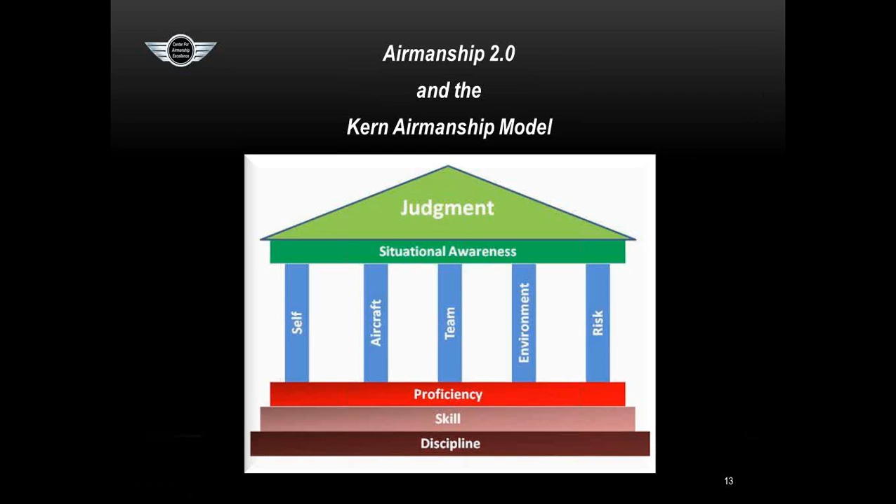Another way to look at Airmanship 2.0, what is it, is to ask the question: if I don't fly right, should I fly at all? I mean, at the surface this seems like a very simple question, but if you really think about it, what does right mean? If I'm not going to do everything as right as I can, should I even fly at all?

That question is answered in Airmanship 2.0 by Chuck Yeager when he said, if you're going to fly, do it right. Now, we lifted that quotation out of Redefining Airmanship, but Kern goes on to explain that when Yeager was first quoted for this statement, he was a young test pilot. So this isn't the old general, 60-some-year-old Chuck Yeager who got conservative and paranoid like all of us old aviators have a tendency to do. He's been saying this all along, and he's generally recognized to be one of the top aviators on the planet.

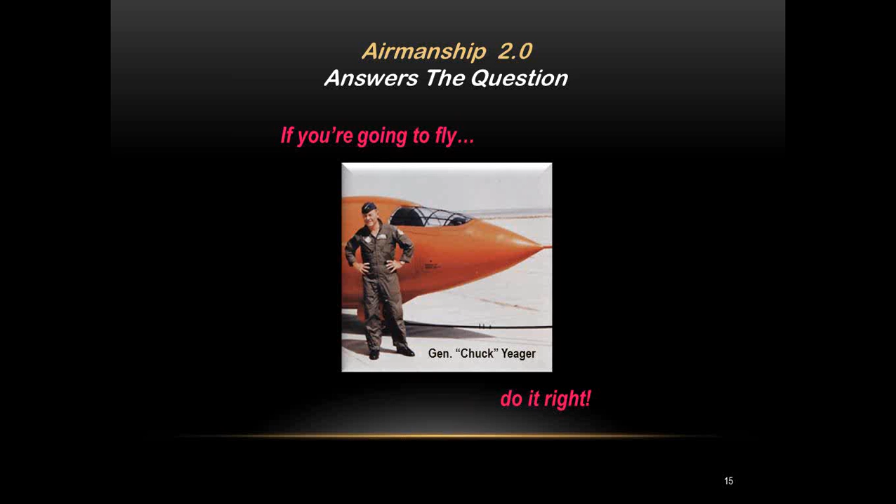So that's Chuck's motto: if you're going to fly, do it right. It's my motto, and it's the motto of Airmanship 2.0. So another way to look at Airmanship 2.0 is doing it right. Of course, the devil's in the details of what doing it right means.

Airmanship 2.0 is really a new paradigm in personal flying. It's a new way to approach it. But it's based on tried and true airmanship principles that have proven to be effective with the airlines and military. But we've modified those for use by us, by personal flyers, in today's flight environment at a reasonable cost.

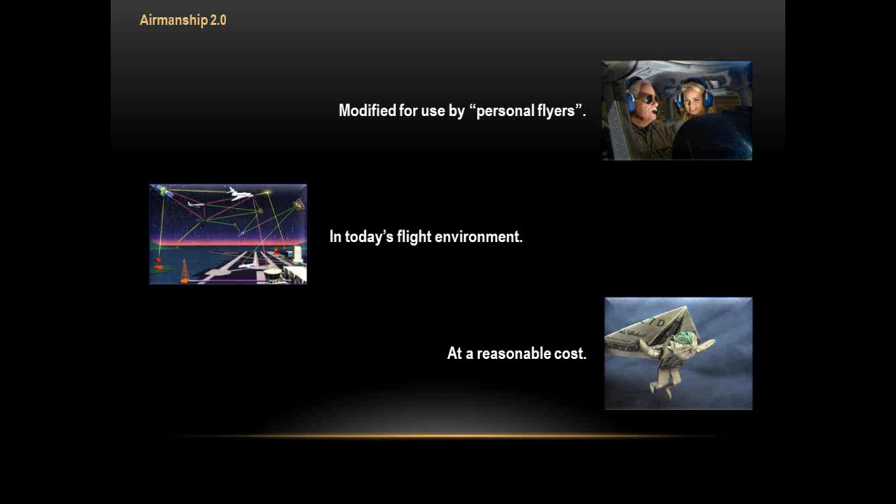A lot of people will say, well, you can't have all of these things that the airline guys and the military guys have that enhance their airmanship, make it safer, make it easier, make it more fun and enjoyable. And the answer is yes, you can, because we've run the cost analyses, and a lot of us have looked at it, and we think that we can do all these things at a reasonable cost in Airmanship 2.0. Airmanship 2.0 is a new way for you to enjoy flying.

If you've been flying for a long time, I know from personal experience and guys I talk to, the bloom is kind of off the rose for a lot of us. So it's a new way for us to get back in there and enjoy it. For those of you who have not been in flying very long, it's a way for you to keep enjoying it. We have that old saw about the $200 hamburgers and boring holes in the sky. So Airmanship 2.0 is a way to enjoy it more.

It's also a new approach to maximizing the personal rewards you get from flying. And of course, Airmanship 2.0 increases the value you get for your flying dollar. We all believe that flying is too expensive. It should be free, right? It should be somebody else paying for this for all of us. But we in personal flying, we have to pay for it. So we need to get the max value out of every dollar we spend, and Airmanship 2.0 is designed to do that for you.

Airmanship 2.0 continuously enhances your airmanship skills, knowledge, and capabilities. And that's what Airmanship 2.0 is all about. Airmanship 2.0 is a surefire way for you to become a safer, more proficient aviator.

Standby one, I'm scanning the roster for hands up. I see a hand up, I think that was Joseph Imilkowski. Joseph, did you have something you wanted to comment on? Is my mic working now? Mic's working great now, I hear you 5 by 5. Oh okay, yeah, I wasn't expecting to participate audio-wise, so I didn't even have the mic hooked up. Okay, that's it, so go ahead. Great, thank you for doing that and letting us know. I'm going to mute your mic again, put your hand down. Okay, and that's what I'll do periodically, I'll go through and see if I see hands coming up, and I will try to get to you for your question or comment. All right, looks like the board is clear. Stand by while I get us back to where I need to be, and we'll proceed.

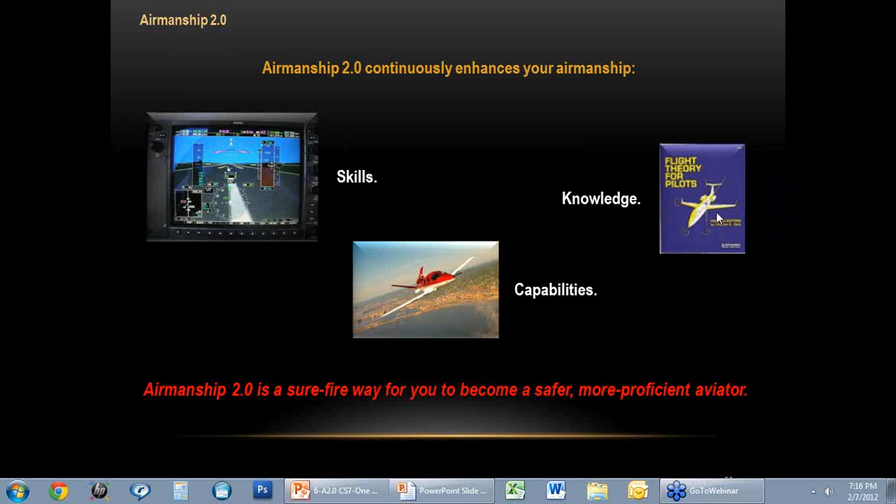Airmanship 2.0 includes a flight operations support team. This is actually a very important element of Airmanship 2.0. That flight operations support team does trip planning, helps you with trip planning, flight planning. It dispatches flights with you. It tracks your flights, it provides in-flight support, and it provides trip management. It really is shared decision making and checks and balances. Those are airmanship terms, and that's what the flight ops support team provides.

Well again, it was only the 51,000-foot flyby, that was just the tip of the iceberg. Very little information there about what Airmanship 2.0 is, but I hope it gives you a little bit of context here. If you want to explore it more, go to the Center for Airmanship Excellence website, airmanshipexcellence.org, and there's a subweb there, a menu button. Go to Airmanship 2.0, and there is a series of video briefings in that subweb that will tell you everything you want to know about Airmanship 2.0.

All right, at this point, are there any questions or comments about Airmanship 2.0 before we move into the case study? And I'm going through the roster again, so please raise your hand if you have any questions or comments. Joseph, I see your hand up again. I'll bet you I've had this before. There's something going on with your button there for that, so I'll ignore that if you don't mind and check with you later. But I imagine it's just popping up on its own. Okay, I don't see any questions or comments at this time. Stand by one more second. Quite an extensive list here this evening, so it takes me a little while to get through it. Okay, I'm going to go back to what I have to do here, and we'll move on.

All right, this Airmanship 2.0 case study number 7, one wing low.

Now, we're not going through this case study to point fingers at anybody. Quite the contrary. James Joyce said that mistakes are the portals of discovery, and that's what we're here for this evening, to learn from others' mistakes. And that's a tradition in Airmanship 1.0 as well as Airmanship 2.0, to try to learn as much as we can without having to make our own mistakes, because our mistakes can be fatal.

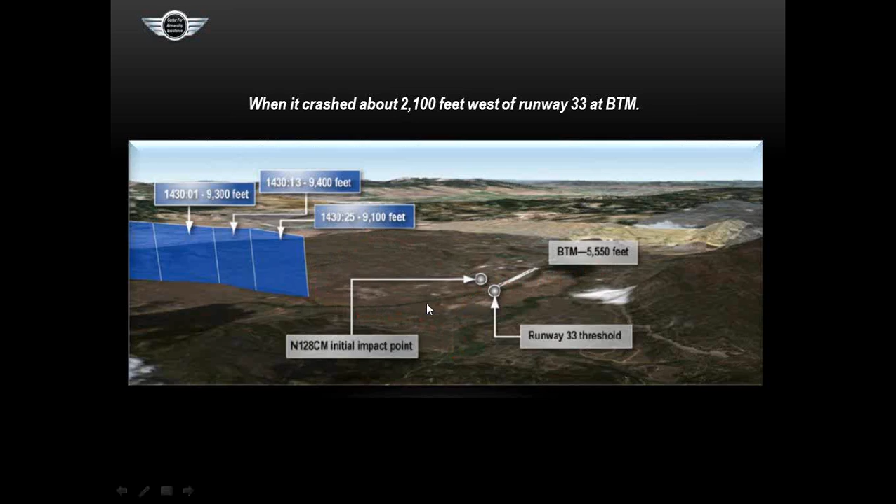The pilot and the 13 passengers were fatally injured, and the airplane was substantially damaged by impact forces and post-crash fire.

Visual meteorological conditions prevailed at the time of the accident, so it wasn't an IFR-related accident, if you will. The pilot held an airline transport pilot certificate with a rating for multi-engine and commercial privileges in airplane single-engine land. So he had proper credentials for flying the flight.

The pilot's most recent second-class medical was dated April 4, 2008, so he was coming up on a renewal on his second class, with the limitation that the holder must possess corrective glasses for near vision, so no biggies there.

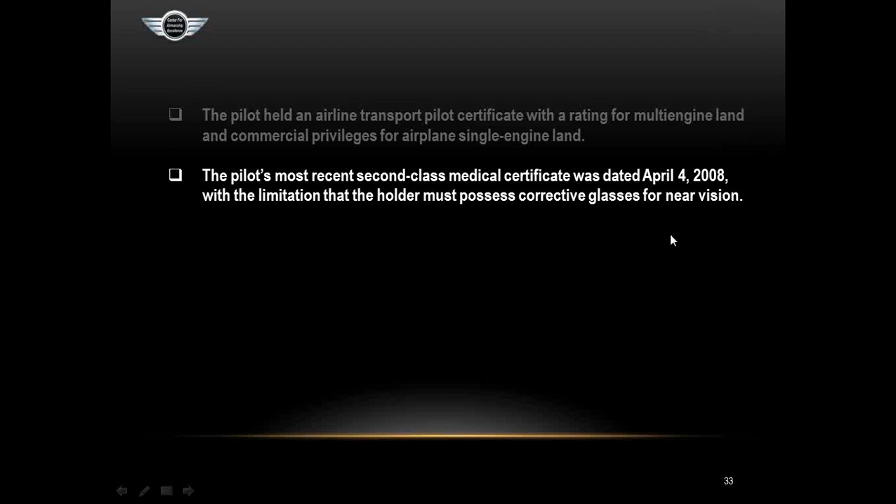The pilot had flown for the U.S. Air Force between 1969 and '72. He was type rated on the Lockheed L300, which is the C-141, and the T-33, which some of you guys remember was a single-engine jet trainer the Air Force used for logistics and training and a lot of things.

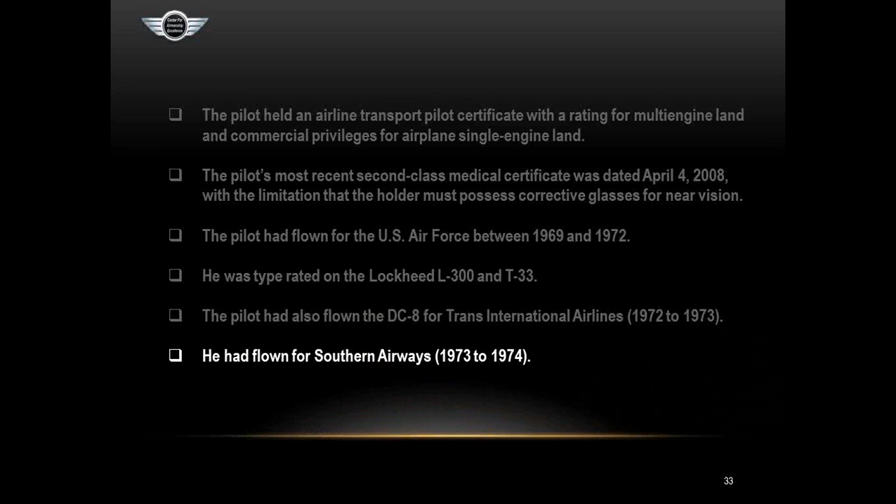The pilot had also flown the DC-8 for Trans International Airlines for about a year. He had flown for Southern Airways for about a year. They were flying DC-9s back then. He flew for Resort Commuter Airlines from '88 to '89. So, in addition, he flew the PC-12 for Native American Air Ambulance from 1999 to 2002.

When he was not employed as a professional pilot, he worked in various fields not related to aviation, so he was a semi-professional, I would call him. The pilot was hired by Eagle Cap Leasing in November 2002 as a contract pilot, so 7 years before the accident. Been there a long time.

He had accumulated 8,840 hours total flight time, quite a bit, with 1,760 in the PC-12, which is a lot in type. He had flown 35, 26, and 10 hours in the 90, 60, and 30 days preceding the accident. So he flew 10 hours in the month preceding. He flew a little more than 10 hours a month, or almost 10 hours, in the 3 months preceding that. So he was doing right around 10 hours a month.

The Air Force did a study, and for multi-crew MATS type, cargo type flying, transport type flying, the Air Force came up with the optimum number of hours a month to have peak proficiency is 40 hours a month. 30 hours a month. More than that, you have a tendency to go for complacency and fatigue and so forth, and less than 30, you're not flying enough to maintain your proficiency.

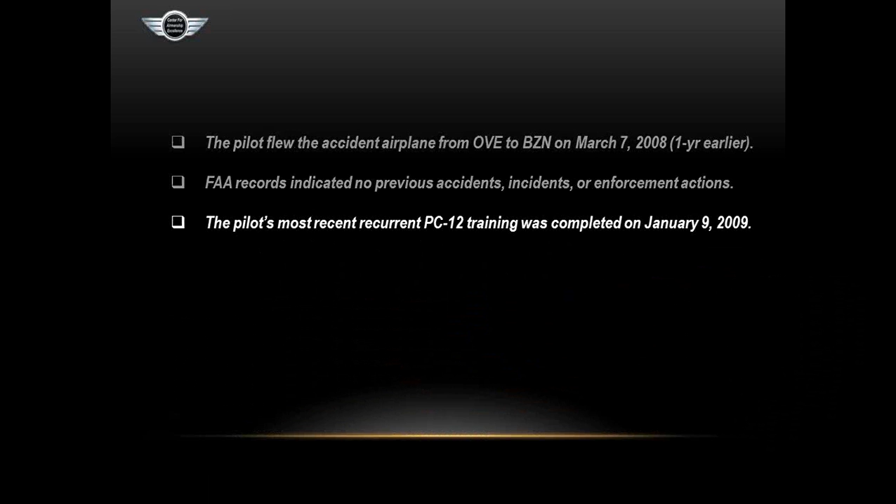The pilot's most recent recurrent PC-12 training was completed on January 9th, 2009, so he was fresh out of recurrent. The instructor stated that he had conducted several previous training sessions with the pilot between 2003 and 2009. In one of my aviation lives, I was an instructor and check airman for FlightSafety on Challengers for about 4 years, out in Tucson, and so I had guys coming back where I'd work with them every year on their recurrent.

And I really got to the point where I knew really accurately the level of airmanship a particular pilot would possess after the second, third time, for sure. So this instructor, who we're going to get some information from in a minute, had worked with this guy plenty to know a lot about him.

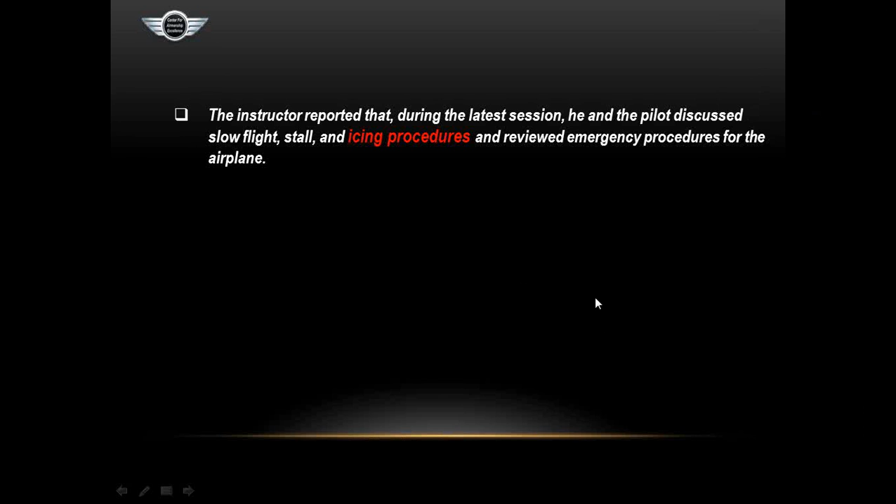The instructor reported that during the latest session, he and the pilot had discussed slow flight, stall, and icing procedures, and that's an important part of this, and reviewed emergency procedures for the airplane. So that would be standard for this type of recurrent training. They also would have reviewed limitations and that sort of thing, operating recommendations, cautions, warnings.

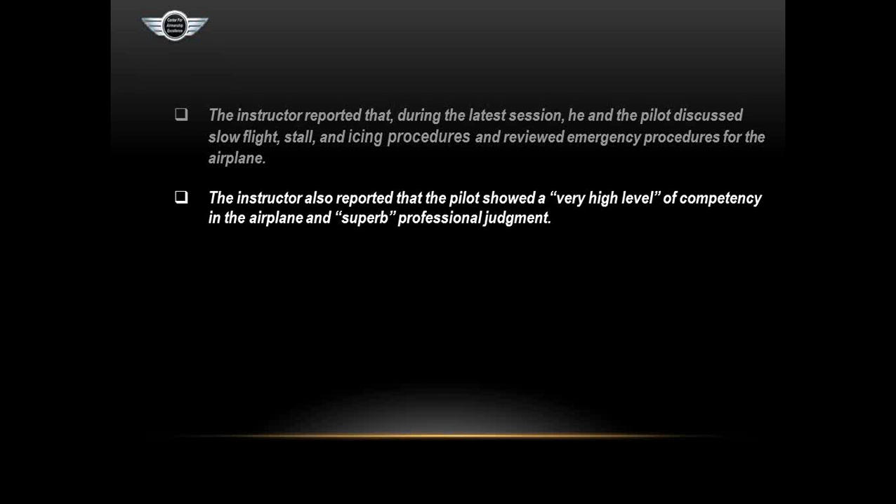The instructor also reported that the pilot showed a very high level of competency in the airplane and superb professional judgment. So I think you can see from this guy's training, military, airline, 135, and so on, that he had developed very good professional judgment. Further, the instructor stated that during a post-flight briefing, the pilot indicated he had not experienced any undue pressure to fly in bad weather or with mechanical problems.

And I used to ask all the crews that I trained on the Challenger about that, because we call it pilot pushing, but if you work for somebody that owns the airplane and they put a lot of pressure on you to fly when sometimes you don't think you should fly, that is a highly risky situation, and there are strategies you can employ to mitigate that risk. So I would pass those along and share them with the guys if they didn't know about them, if they were in that kind of situation. But obviously this instructor was very experienced.

He had asked this guy about that kind of external pressure, because that's important for decision making, risk management, and the pilot at least reported that the company he was working for didn't put any pressure on him. And an owner of the aircraft praised the pilot's professionalism. Now, it doesn't say in the report whether that owner is a pilot himself, but after 7 years, at least it shows the pilot didn't scare him. So the owner thought he was a real professional pilot.

On March 18th, which is 3.5 days before the accident, the pilot flew passengers aboard the accident airplane on a flight that departed REI. I'm sorry, I'm not coming up with the airport name. We're going to see it in a minute. I think it's Redmond. About 11:30 Pacific Daylight Time, and arrived in Cabo San Lucas, Mexico, 3 hours later. So a pretty long leg in that Pilatus, but he flew just one leg that day.

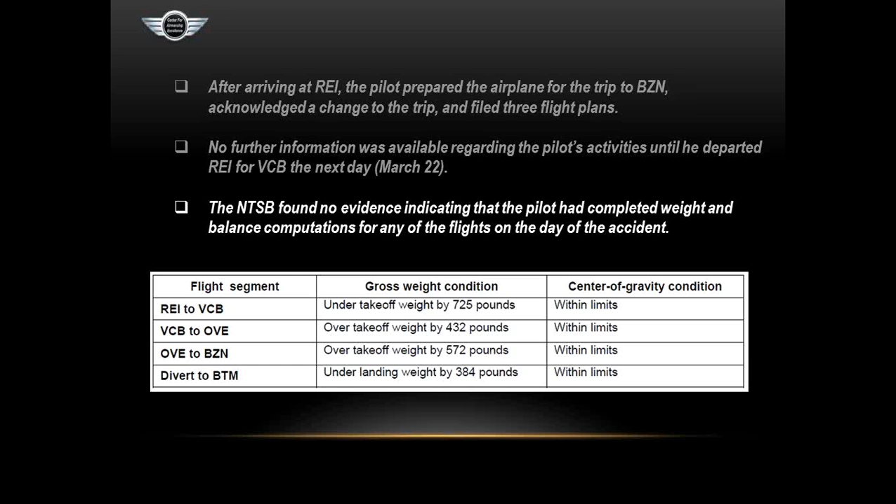The NTSB found no evidence indicating that the pilot had completed weight and balance computations for any of the flights on the day of the accident. And you can see here that on the first leg of the accident day, takeoff weight was adequately under max gross, but not terribly under. On the second leg, he was over max gross. On the third leg, he was over max gross. So he was ignoring the max gross weight limitation on the airplane. But the center of gravity was within limits.

On the day before the accident, the contract pilot had the airplane topped off with 220 gallons of Jet A to its total capacity at Redlands. That's REI, I'm sorry, Redlands, California Airport, which is just out here to the east of the Los Angeles basin. It's out here, Redlands.

Okay, stand by one while I check for hands up. Just give me a second. I'm sorry, that almost sounded like a command of hands up. I apologize. Okay, Frank Blair, I see your hand up. I've opened up your mic. Go ahead, Frank. Hi, it's Frank. I was just saying it's Redlands, California, but you got to it. No problem. Thanks, Frank, for contributing that. You know, that's one reason I do these PowerPoints. I knew it was Redlands, but I couldn't remember it, and I didn't review the PowerPoint enough. So thank you for that. Okay, I don't see other hands up, and I'm putting all the hands down. Stand by just 1 second. Okay.

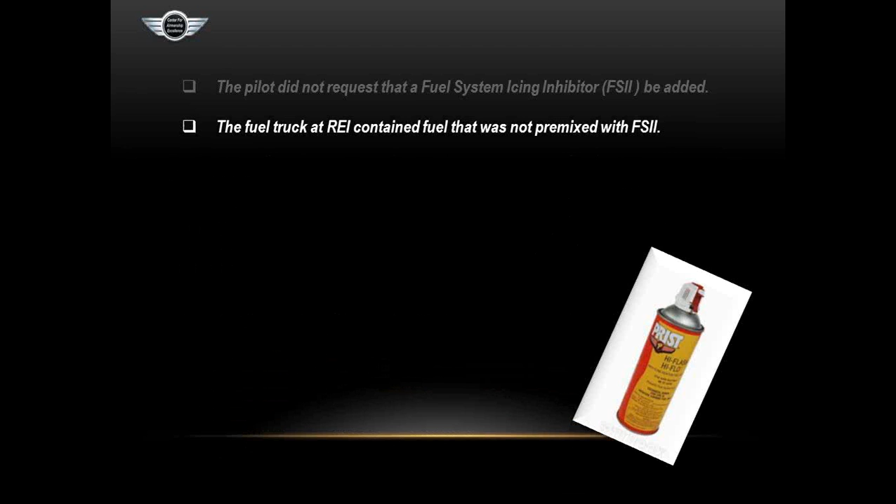The pilot did not request that a fuel system icing inhibitor be added to the fuel load that he took on there at Redlands. The fuel truck at Redlands contained fuel that was not pre-mixed with, and I'll use the term PRIST, that's the trade name for it. Most of us know it as PRIST. There are other brands, though. But the fuel pump was capable of injecting PRIST during the fueling at the request of the customer.

The can comes with a nozzle that has a little clear plastic tube, and then there's a bracket on the fueler nozzle that you plug the tube into, and you connect the can to the nozzle in a bracket, and when you squeeze the fuel handle to put the fuel in, it also then opens up the valve on the can, and it shoots a metered amount of PRIST in with the fuel as it's put in the tank.

Very simple system. Fuel records showed that between February 27th and March 21, the airplane had been fueled at Redlands 4 times without the addition of PRIST. So that's significant. Most PC-12 flights require the use of PRIST.

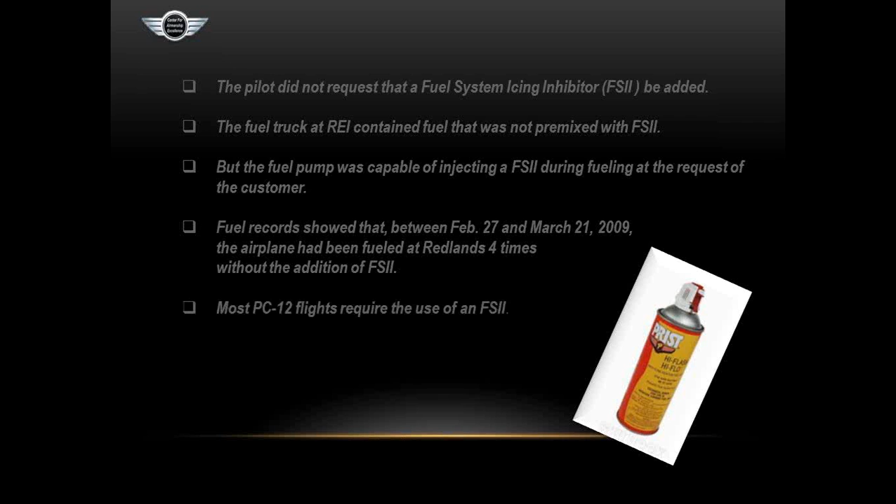So this would have been covered in his initial training, in his recurrent training, when they went over limitations on the airplane. There's no way he could not have known that he should be using PRIST on most of his flights. And it's an outside temperature limitation, which then translates pretty much into a time of year and altitude limitation.

All right, I've got the first poll question here for you. We've got a few poll questions tonight. Here's where I have to really pay attention and step through this. So stand by while I get the polls up. First poll question.

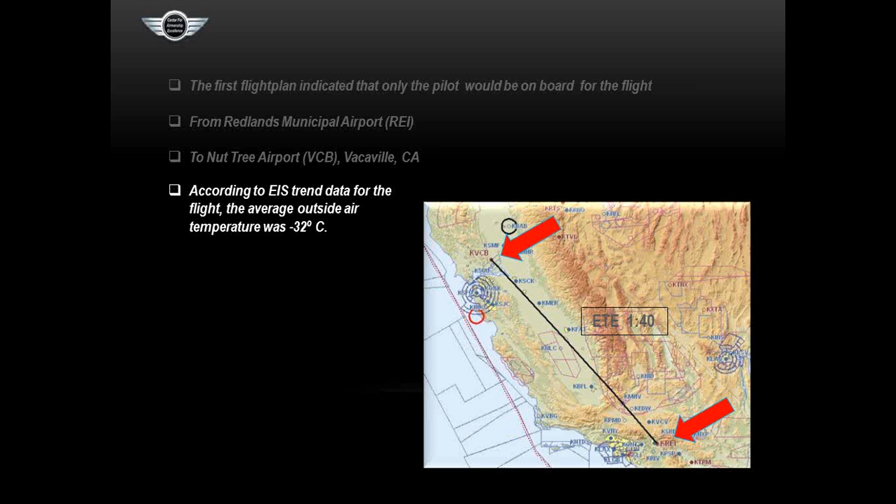According to the EIS, the Electronic Instrument System trend data, which they pulled from its memory after the crash, the average outside air temperature for the flight was -32. That happens to be much colder than the Pilatus book says it needs to be before you have to have PRIST. So in other words, he was way below the temperature for the PRIST requirement on that first leg, and it was a long leg, about an hour and 40 minutes.

About 1 hour and 30 minutes into the flight, while the airplane was already descending through an altitude of about 10,000 feet, the left and right boost pumps began cycling, generally on and off for 10 seconds, and then on for 10 and then off for 1. And we're going to talk about how those boost pumps are supposed to work in a second. So that's a clue there.

According to the Pilatus AFM, the fuel boost pumps operate automatically if a low fuel pressure state exists. The fuel pumps continued cycling for 15 minutes in this flight, even though they were designed to turn off automatically 10 seconds after fuel system pressure was restored to 3.5 psi.

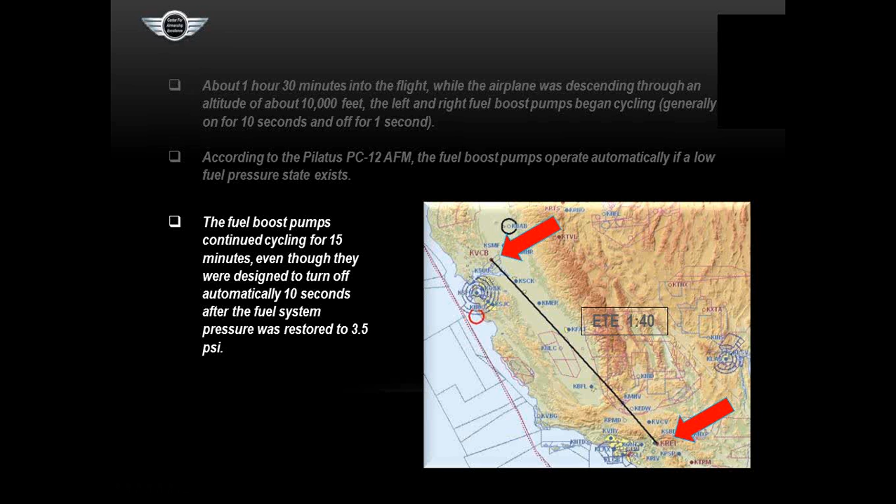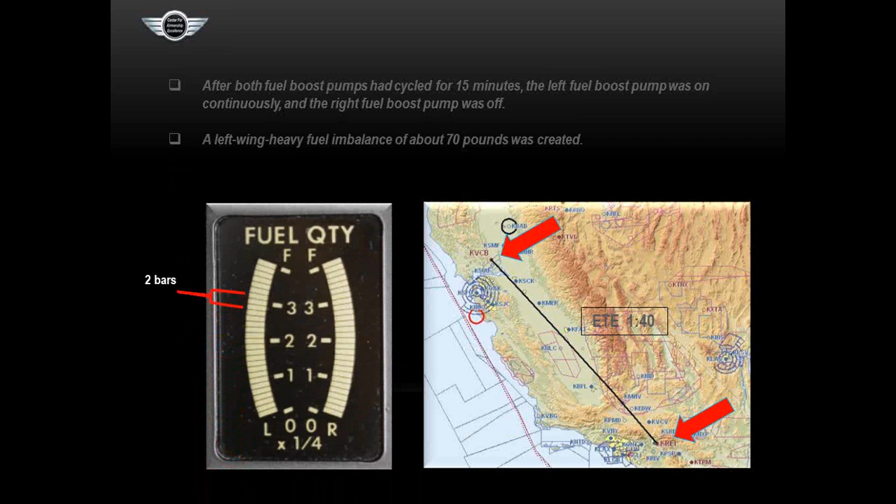After both fuel boost pumps had cycled for 15 minutes, the left fuel boost pump was on continuously and the right fuel boost pump was off, and they were both set in auto mode at this point. A left-wing heavy fuel imbalance of about 70 pounds was created, which would have been about 2 segments on the fuel indicator - noticeable, but not something that would jump right out at you maybe.

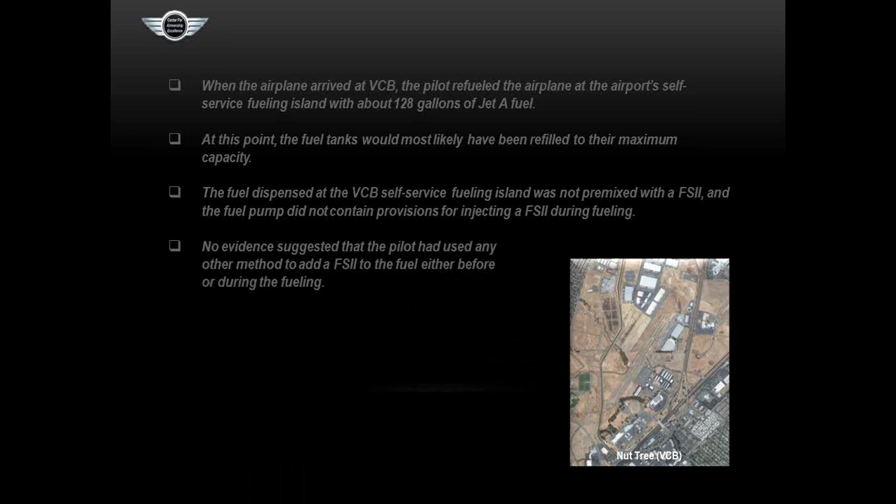No evidence suggests that the pilot used any other method to add Prist to the fuel, either before or during the fueling.

Surveillance video obtained from Nut Tree showed the pilot performing some parts of the required pre-flight inspection. However, the video showed no evidence that the pilot had sampled fuel from either of the underwing fuel tank drains or the fuel filter drains. Also, the surveillance video did not show any evidence that the pilot examined the fuel filter bypass indicator to ensure that it was flush with the filter housing assembly.

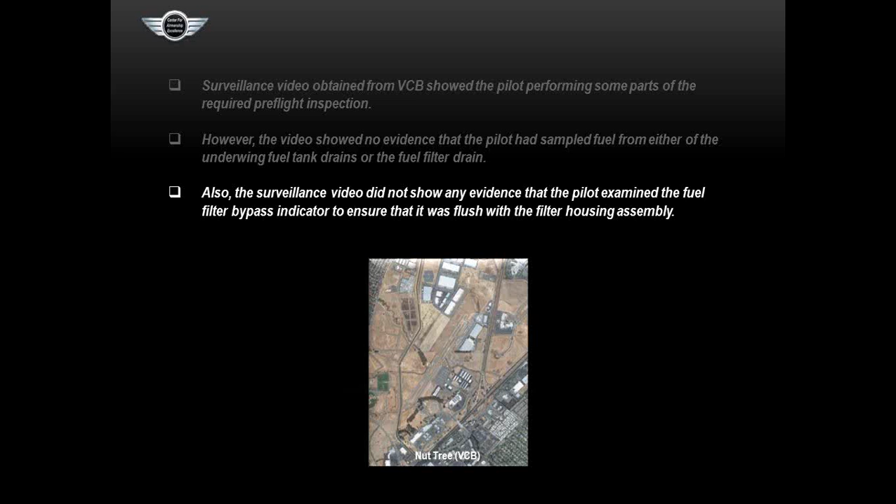The fuel filter had a bypass - a little button or rod that would pop out if there had been a bypass of the filter. That's part of the pre-flight on this airplane. If he had checked it, in a post-flight or pre-flight, that would have been another clue that something was going on with that fuel system that wasn't right. But he didn't complete a good pre-flight.

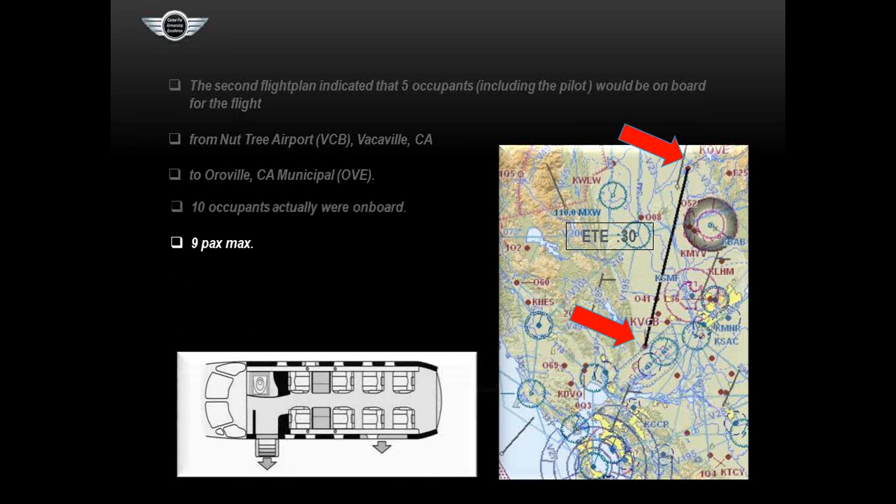The second flight plan indicated that 5 occupants, including the pilot, would be on board for the flight from Nut Tree up to Oroville, where they were going to pick up more passengers. But 10 occupants actually boarded the airplane at Nut Tree. So he had a flight planned for 5, then 5 more showed up - 10. But the max passenger load on the airplane is 9. So he had to make a decision here to overload the airplane, which he did.

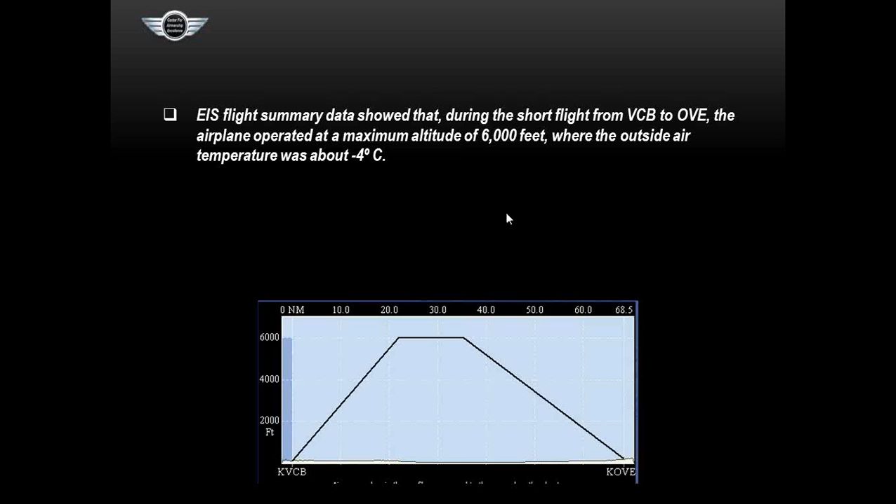The electronic instrumentation system flight summary data showed that during the short flight from Nut Tree to Oroville, the airplane operated at a maximum altitude of 6,000 feet, where the outside air temperature was about -4. The airplane was exposed to a higher outside air temperature than it would experience on the first leg, so that's outside the fuel icing area that the Prist is put in there to prevent. However, Prist was still required per the AFM for the flight.

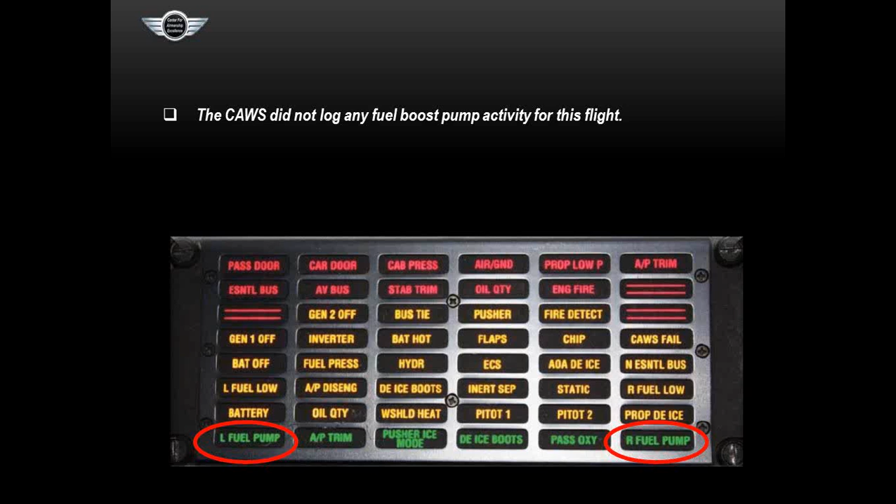So even though it was warmer, it was still required. The crew alert and warning system, this is a picture of it out of the PC-12, did not log any fuel boost pump activity for this flight. If it had, it would have shown left fuel pump or right fuel pump on.

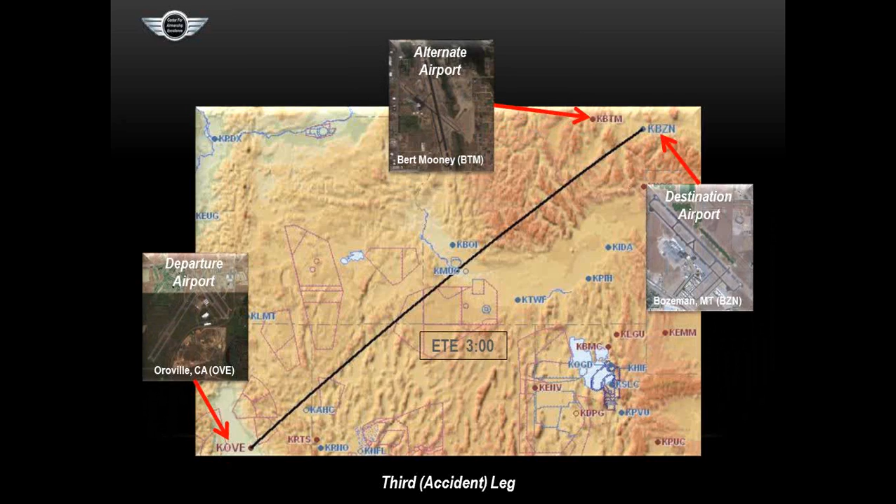The fuel consumption estimate for the flight on that second leg was about 200 pounds. Remember, he topped it off at the first stop, and then consumed about 200 pounds going up to the second stop. Now, the third leg of the flight, the accident leg, started out here in Oroville, California, and the destination was Bozeman, Montana, with a named alternate of Bert Mooney up in Butte, Montana, about 3 hours ETE.

When the airplane arrived at Oroville, 4 additional passengers boarded, bringing the total number of airplane occupants to 14 people: the pilot, 6 adult passengers, and 7 child passengers aged 1 to 9. The NTSB said the pilot was aware that the airplane would have only 9 seats available for the 13 passengers. So he was way overloaded on the flight.

Now you say, well, why would a very experienced guy like that decide to do it? We've already seen he's got a bit of a pattern of getting away with breaking the regs or ignoring things. But also, when you're in that kind of job, and it depends on you making these folks happy all the time, you have a tendency to get in the mode of trying to do that and not saying no to them. Since there were kids involved, and since he never did a weight and balance, he didn't know how far over gross he was at takeoff, although we saw earlier he was over gross.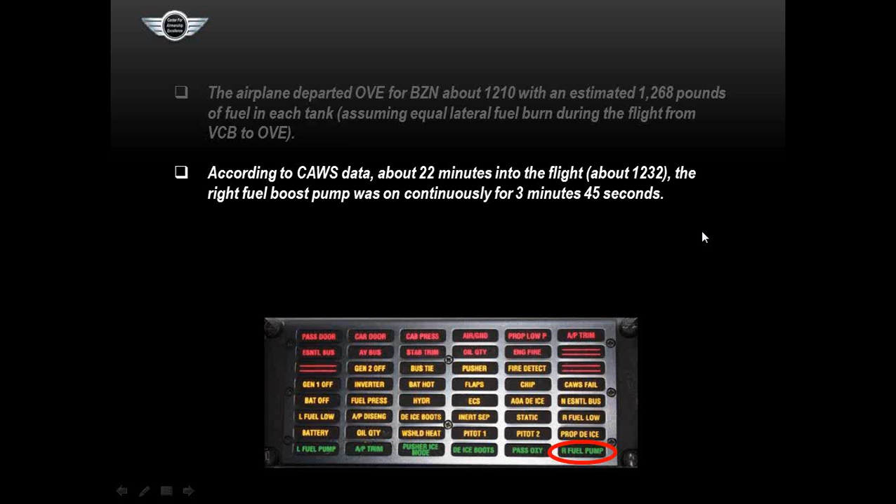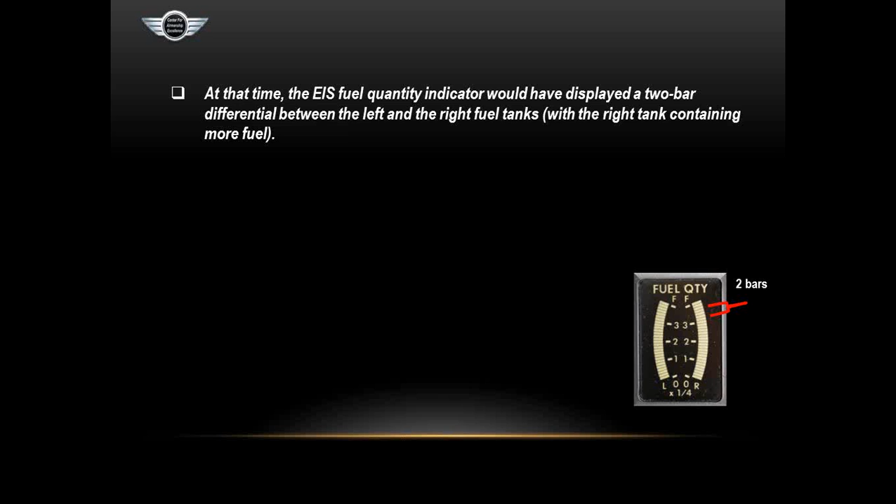This activity was consistent with normal operation of the automatic fuel balancing system to laterally balance the fuel load. At the time, the EIS fuel quantity indicator would have displayed a 2-bar differential between the left and right fuel tanks, with the right tank containing more fuel. So 2 bars, out of 28 bars total. You'd notice it, I think, but it's not real noticeable. And there's an indication here the guy was flying on autopilot most of the time, so he probably wasn't feeling the problem at that time. It was only a 70-pound fuel imbalance, right wing heavy.

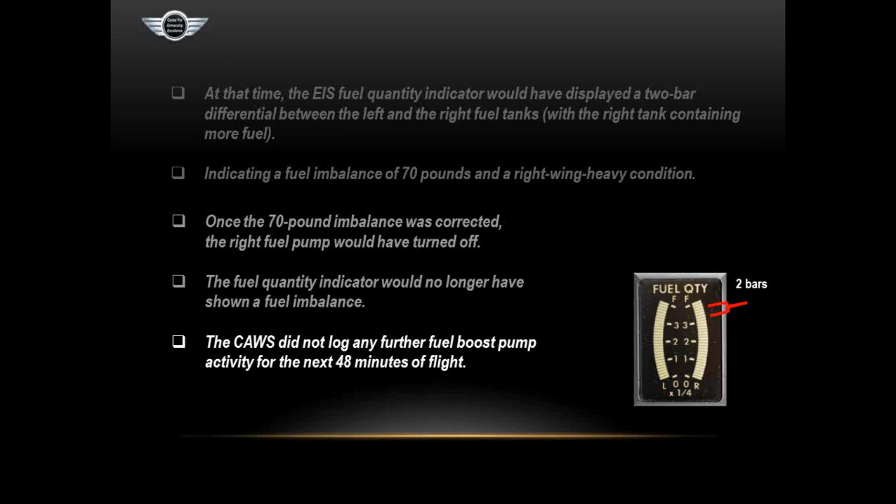But once the 70-pound imbalance was corrected, the right fuel pump would have turned off. The fuel quantity indicator would no longer have shown a fuel imbalance. The CAWS did not log any further fuel pump activity for the next 48 minutes. So that looked like a normal operation, balanced the fuel, everything went back to normal. That's a confusing clue if you're trying to hook all these dots together from the indications on the prior flights. Now the fuel system's operating normally.

About 1:13 into the flight, both fuel boost pumps began cycling because of low fuel pressure states. Now, the pilot didn't know it was low fuel pressure. He just started seeing those lights coming on and off, both sides on and off, which is not a normal indication anytime. He didn't know if it was from low fuel pressure or something to do with the balancing, something wrong maybe with the sensors to balance the fuel. So confusing indications. EIS trend data showed that the airplane was operating at the time at its cruise altitude, and the average outside air temperature was -40, much below the required temperature to freeze water in the fuel.

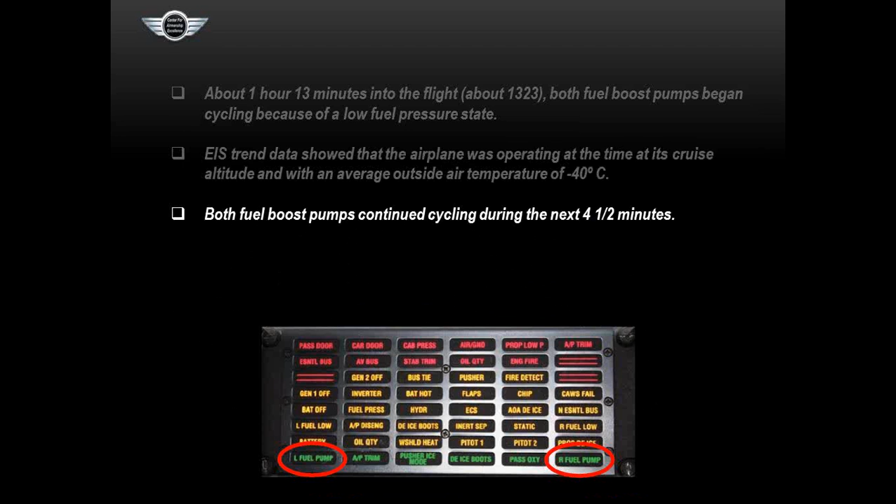So it was cold enough to put ice crystals in the fuel. Both fuel boost pumps continued cycling during the next 4.5 minutes, so that very unusual indication kept going for quite a while. No low fuel pressure cautions were logged during the flight, indicating that the low fuel pressure state was alleviated by the operation of one or both fuel boost pumps. So the boost pumps were not responding to the imbalance at this point - they were responding to low fuel pressure they were sensing. But there was really no way for the pilot to know what was causing them to cycle.

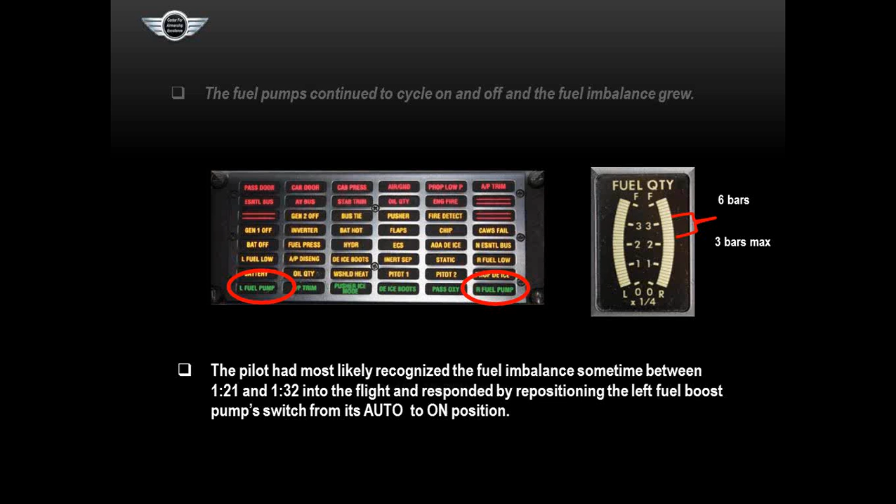The fuel pumps continued to cycle on and off, and the fuel imbalance grew. Time is going by while all this is happening. The pilot had most likely recognized the fuel imbalance sometime between 1:21 and 1:32 into the flight and responded by repositioning the left fuel boost pump switch from auto to on, because remember now we're getting more fuel in the left tank. That's a pretty logical thought - if I'm not getting the fuel out of that tank in auto, why don't I turn that boost pump on? The fuel boost pump switches are push-push switches on the overhead of this airplane - that's the auto position and that's the on. So he cycled it from auto to on. Auto was normal.

So another poll question for you. Stand by. I'm going to read this to you before I put it up because I can't see the whole question after I launch it. Do you think the pilot's use of a non-standard procedure was a link to the error chain? Yes or no?

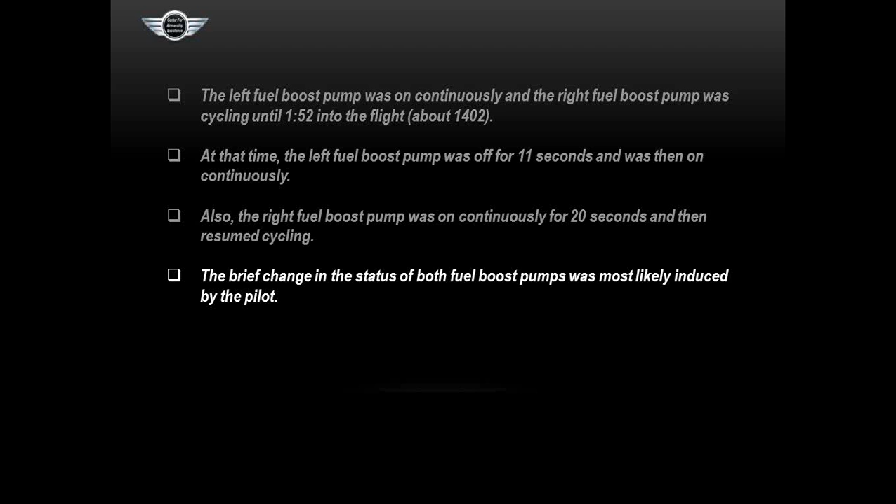Specifically, the pilot most likely recognized that the fuel imbalance was not being corrected, and as a result repositioned the left fuel boost pump switch from on to auto, and the right boost pump switch from auto to on, to observe the effect that the changed switch state would have on the fuel boost pump's operation. So that's what the safety board said — same thing I just said. This action allowed the left fuel boost pump to remain on continuously regardless of the commands from the automatic fuel balancing system, or the automatic activation of the standby pump in response to the low pressure fuel state.

The fuel imbalance continued to increase. This table shows us different times in the flight. We're up here about 2:10 in. You can see the left tank 1368, the right 274 pounds — about almost a 1,100 pound difference, 23 bars of difference on that. And then it just continues to get worse, to where here at the last reading, he's got a 1,300 pound difference between the two wings.

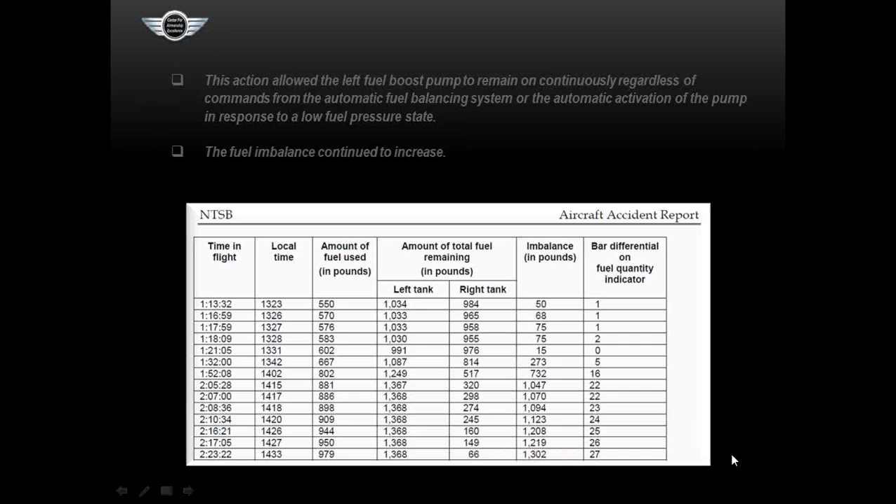At about 2:17 in the flight, the caution system annunciated a right fuel low caution light. So now we've got a new light on — it's an amber light, a higher priority than the green light, and it says right fuel low, which tells him that the fuel in the right tank is now low, and he can see that on his gauge.

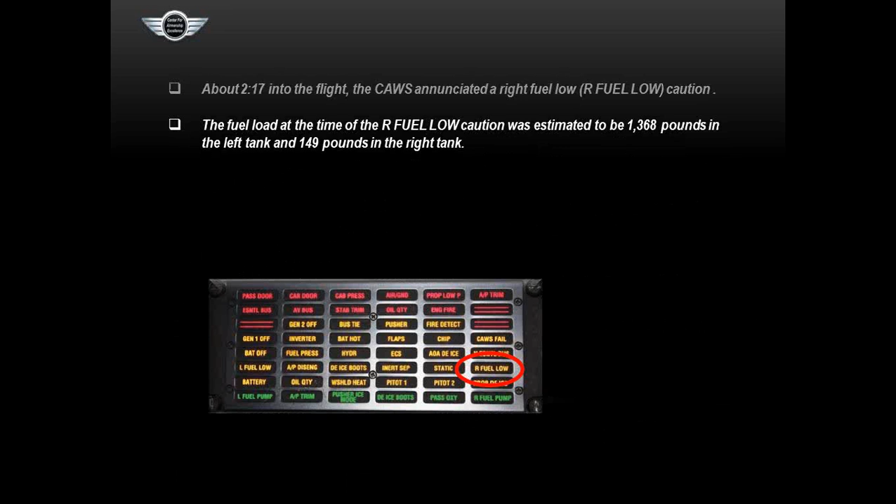The fuel load at the time of the right fuel low caution was estimated to be 1368 in the left and 149 in the right, a 1,200 pound difference. On that kind of airplane, that's starting to become a huge difference — a 26 bar difference there. That should have shown up in addition to those caution and warning lights. That should have been very obvious to him. Probably was, because obviously he was trying to solve the problem.

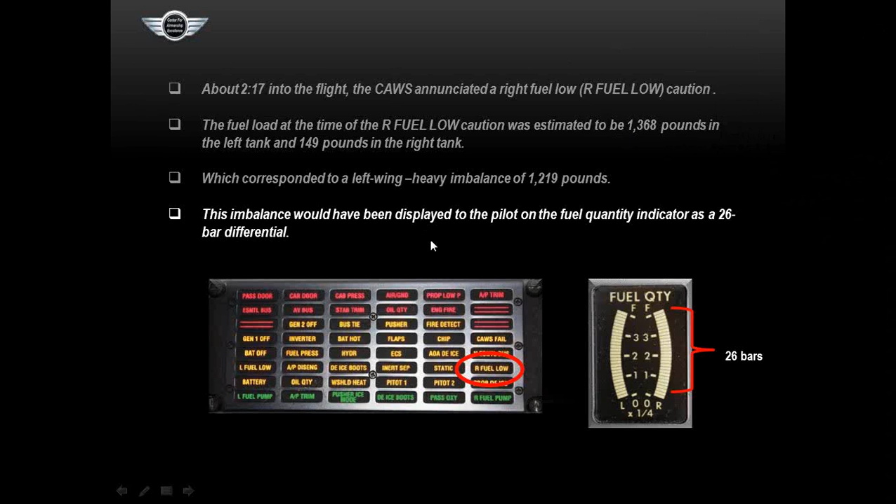5 seconds later, the right fuel boost pump turned on continuously and remained on until the end of the flight. The left fuel boost pump had been on continuously since 1426 and remained on through until the end of the flight. The time of the last CAWS entries for the flight was about 1433. The fuel imbalance would have been displayed to the pilot as a 27 bar differential — remember, there's 28 bars there.

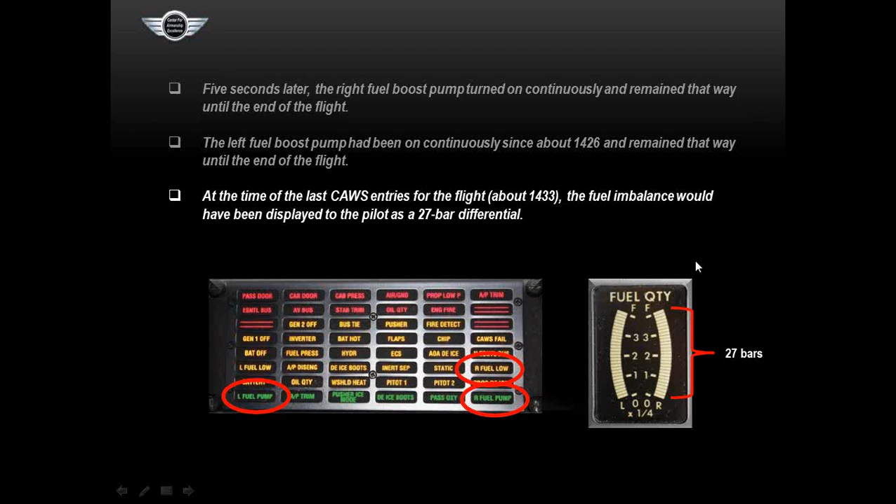The right fuel boost pump was providing all of the fuel system pressure to the engine because the left side fuel system was no longer able to maintain the required fuel pressure through the operation of the left fuel boost pump, due to icing. At that time, the fuel pressure output was less than 2 psi, even with the left fuel boost pump on continuously, due to icing in the fuel filter. The circumstances resulting in the low fuel pressure state and the degraded performance of the left side fuel system were not resolved at any time during the flight.

So what's the definition of insanity? Continuing to do something over and over in the same way and getting the same results. If you follow that definition, he was in a state of insanity for a good part of this sequence of events here. He kept doing it over and over, couldn't get any different results.

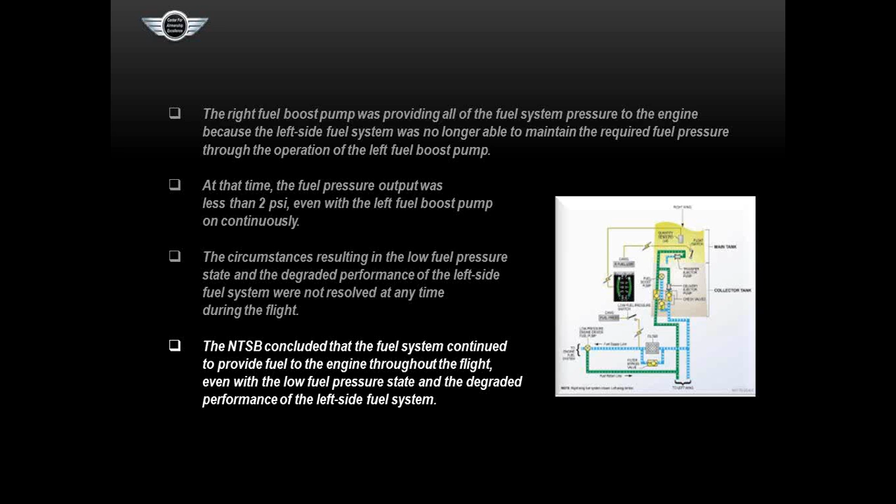The NTSB concluded that the fuel system continued to provide fuel to the engine throughout the flight, even with the low fuel pressure state and the degraded performance of the left side fuel system. So he never ran it out of fuel. The engine kept running right up till the time they hit the ground.

Here's another aspect we need to look at that comes into the judgment and so forth. Radar data showed that at 1402, the pilot changed the airplane's route of flight and turned left towards Butte without an ATC clearance. He was on an IFR flight plan.

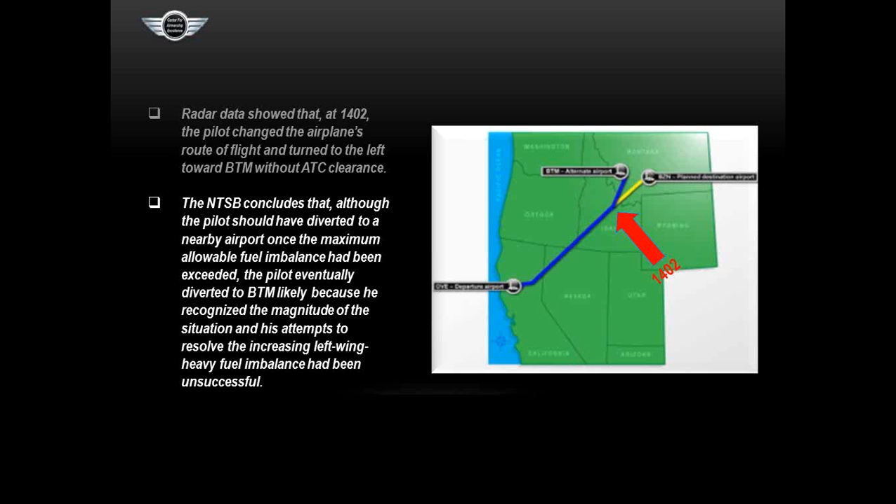The NTSB concluded that although the pilot should have diverted to a nearby airport once the maximum allowable fuel imbalance had been exceeded, he eventually diverted to Butte, likely because he recognized the magnitude of the situation and his attempts to resolve the increasing left-wing heavy fuel imbalance had been unsuccessful. So finally at 14:02 he says, I got to do something, I'm not going to get it fixed. He'd been at it quite a while at this point. You can see by the chart he was slightly closer to Butte than Bozeman, so that's probably his thinking there.

Here, further down the timeline, at 1400 he had a big imbalance, a lot of difference in the gauge, but the closest airport was still only 4 minutes away, so he had closer bailouts. He took it all the way up to where he had this major imbalance, and he still had a bailout at Dillon, which would have been a lot closer airport.

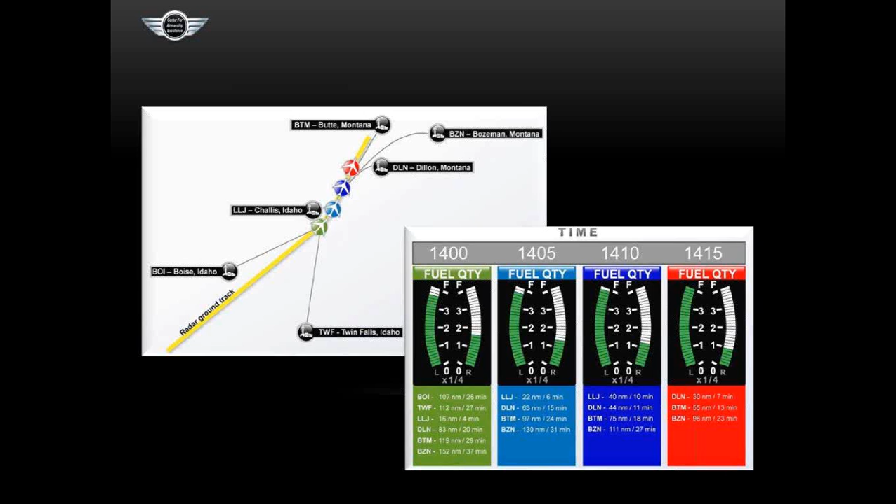So it wasn't just one poor judgment, it was a series of poor judgments. We'll never know why he was making those decisions. I think it had something to do with getting the people closer to where they wanted to go. Remember, they wanted to go to Bozeman. I guess in desperation he finally decided to go to Butte, but again, he could have gone to Dillon, and nobody knows why he decided not to.

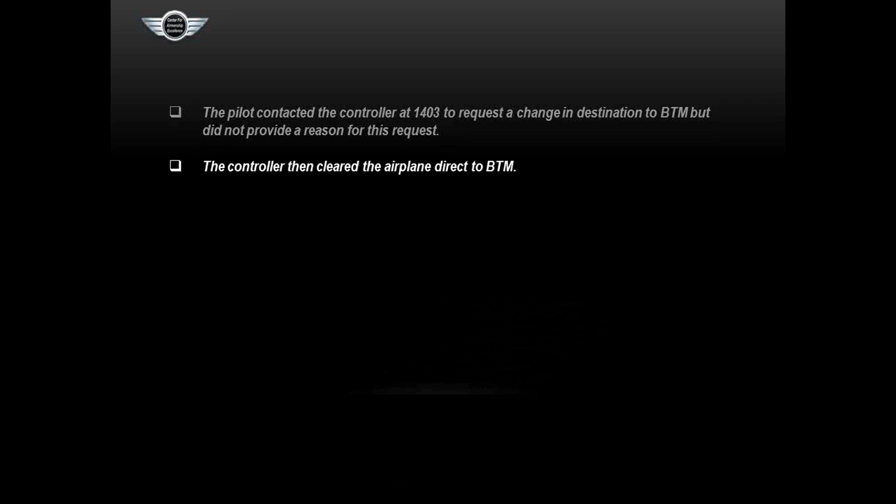The pilot contacted the controller at 1403 to request a change in destination to Butte, but did not give a reason for his request. The controller then cleared the airplane direct to Butte. The airplane began descending from flight level 250, his assigned altitude, at 1404, a minute after he made the request, but he had not been cleared out of 250.

So now this is an indication of task overload, of getting behind the airplane, not staying situationally aware. At 1404:24, the pilot contacted the controller to request a lower altitude. So now he recognized he left his altitude without a clearance, and now he's asking for lower.

The controller cleared the airplane to descend at the pilot's discretion to 14,000 feet. CAWS data showed that about 1405, the autopilot was disengaged. So I alluded to this clue earlier. This tells me the guy probably didn't have the tactile input about the fuel imbalance, although all the intellectual input was there, the fuel gauges, the flashing lights, all that.

But one of the cardinal rules is if you start having problems with an airplane that you can't figure out, if you have the autopilot on, get it off the autopilot so you can feel what the airplane is doing. So now, real late into the problem, he's taken it off the autopilot. He probably really had his hands full when he first took it off the autopilot.

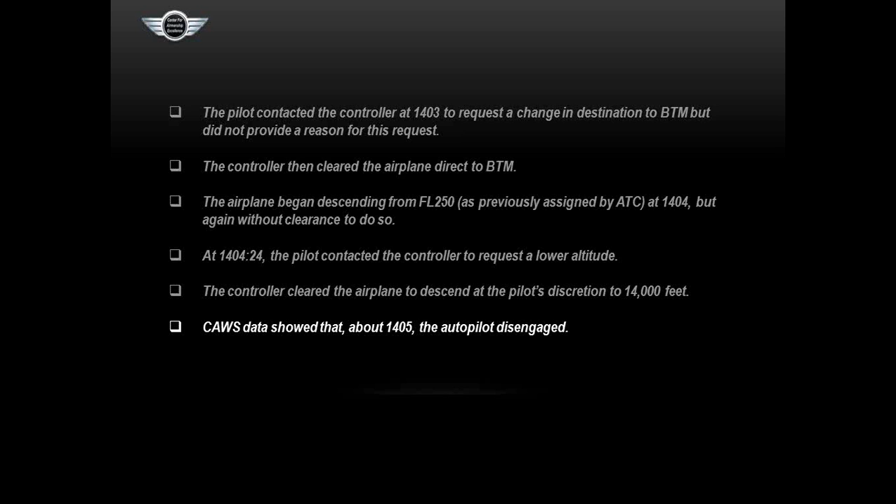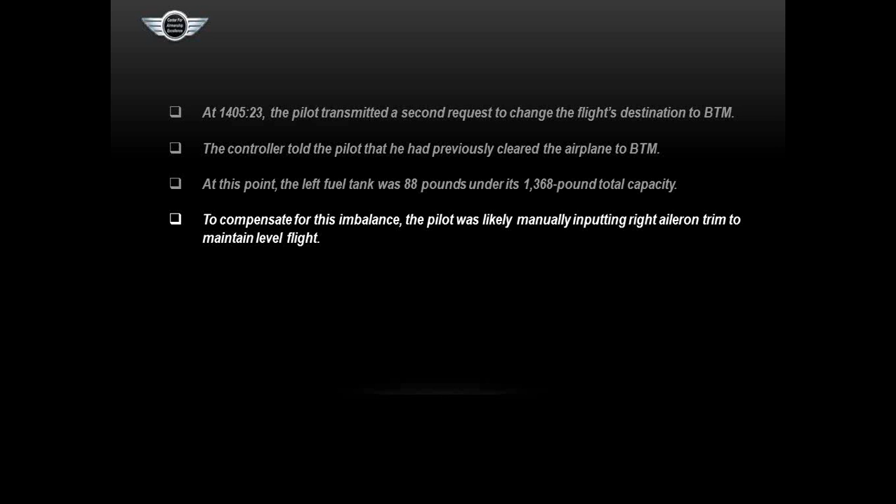At 14:05:23, the pilot transmitted a second request to change the flight's destination to Butte, and the controller told him he already did that. So again, signs of task overload, getting behind the situation. At this point, the left fuel tank was 88 pounds under its max capacity. To compensate for this imbalance, the pilot likely manually inputted right aileron trim to maintain wings level flight. I think that's a logical, a good assumption, and you'll see later there's evidence of that.

Also, according to CAWS data, the pilot was still attempting to resolve the fuel imbalance by toggling the fuel boost pump switches to laterally balance the fuel. So he's diverting his attention to a task that he already knows isn't working, so he's kind of out of ideas and probably maybe even inching up towards a panic mode at this point. Be my guess. At 14:06, the controller instructed the pilot to advise receipt of Butte, Montana weather and NOTAM, standard call by ATC. The pilot responded Wilco.

That's another sign, somewhat subtle, but he's using non-standard radio phraseology. That has been shown to be a sign of a link in an error chain. It's an old Air Force term, so he probably just defaulted to that. He was in task overload. But that's an indication. Now also, you'll see in these ATC communications, the magic words never show up. The magic words, I'm declaring an emergency. So the controller is handling him at this point pretty much like a normal flight. However, the ATC transcript showed the pilot did not acknowledge receipt of the weather or the NOTAMs, so task overload.

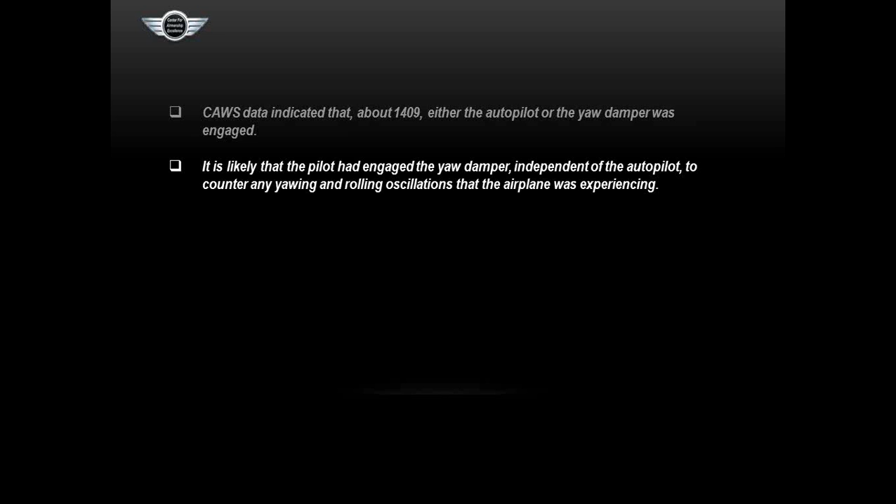CAWS data indicated that at about 14:09, either the autopilot or yaw damper was engaged. It's likely that the pilot engaged the yaw damper, independent of the autopilot, and these are what the experts on the airplane think, to counter any yawing and rolling oscillations that the airplane was experiencing. My opinion, a very bad idea, because again, it takes a lot of that feel away from you, and an automatic yaw damper can actually work against you in this kind of a situation. So I think he was grasping at straws at this point.

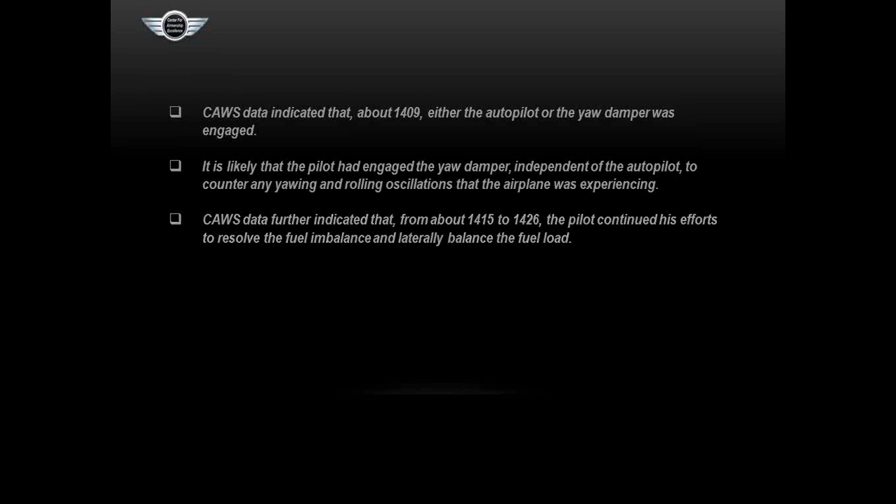CAWS data further indicated that from about 14:15 to 14:26, the pilot continued his efforts to resolve the fuel imbalance and laterally balance the fuel load. So again, wasting his time and attention, distracting himself, probably getting himself into a bigger hole mentally because he can't solve this problem and it's getting worse. And he's probably thinking he's going to run out of fuel because the right tank is going down. I think a logical assumption was the right tank was feeding the engine and it's almost empty, so he's got to get to the airport. So that pressure is building up, links in the error chain.

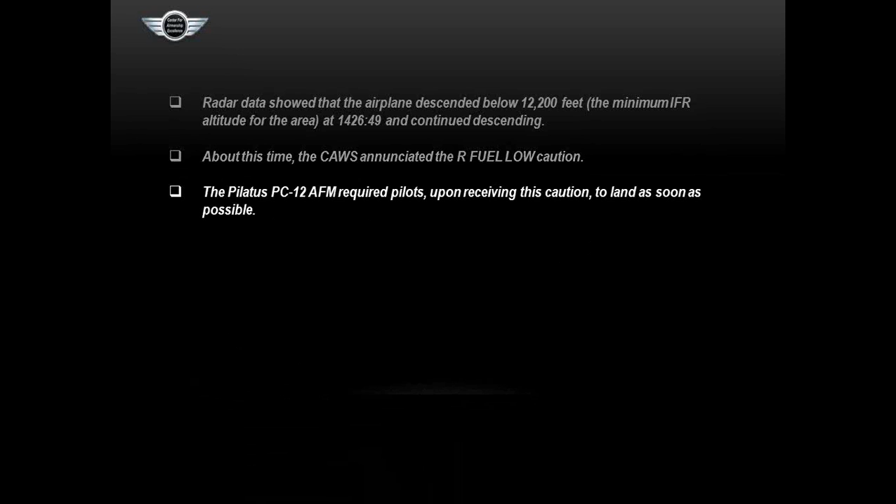Radar data showed that the airplane descended below 12,200 feet, which was the minimum IFR altitude for the area, but remember it was VMC up there, at 14:26:49 and continued descending. So he was heading down for the airport. About this time, the CAWS annunciated the right fuel low caution. The Pilatus PC-12 AFM required pilots, upon receiving this caution, to land as soon as possible. So that just added a little pressure. He was already heading in that direction, though.

Even though the pilot was required to comply with the previously issued ATC altitude restriction of 14,000 feet, because remember, he had never declared an emergency, until he had the airport in sight and could provide his own terrain clearance, it's likely that he continued his descent to the terminal area without clearance to do so because the airplane was likely becoming increasingly difficult to control. So he was kind of in that dead heat to get it on the ground before he ran out of control authority. At that point, the left fuel tank was filled to capacity, and the right fuel tank contained 133 pounds of usable. So there was a big imbalance, a 26-bar differential.

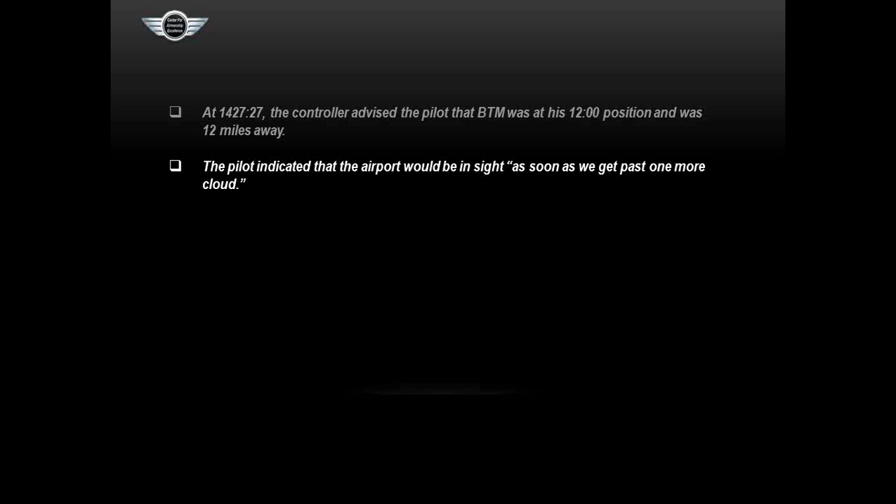At 14:27:27, the controller advised the pilot that Butte was at his 12 o'clock position, 12 miles away. The pilot indicated that the airport would be in sight as soon as we get past one more cloud. So there were some broken clouds in the area, adding to his challenge of finding the airport. And as you recall from that satellite shot and the facts, he was not familiar, we don't think, with Butte, and that was a complicated valley or set of valleys he was descending into.

At 14:28:43, the pilot reported that he had the airport in sight and canceled his IFR clearance. So something finally started going for him. The controller then instructed the pilot to squawk VFR, which is normal because there's still no emergency declared. Radar data showed that the airplane was 8 miles southwest of Butte at an altitude of 11,100, which was 5,550 feet above the ground, so very high, 8 miles out. The airplane continued to squawk the previously assigned discrete transponder code for the next minute and a half, which, again, is a good indicator of task overload. Pilot never got around to either hearing it or doing it for sure.

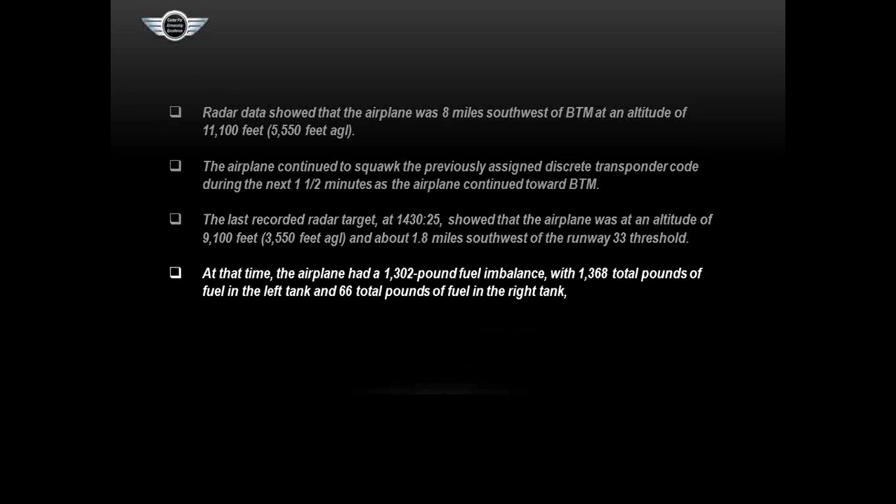The last recorded radar target at 14:30:25 showed that the airplane was at an altitude of 9,100 feet or 3,550 AGL, about 1.8 miles southwest of the runway 33 threshold. So he should have been, at that point, about 500 to 600 feet AGL rather than 3,550. So he was way high to make that runway. At that time, the airplane had a 1,302-pound imbalance, so he was really, really out of balance at that point. The fuel quantity indicator would have been displaying a 27-bar differential between the left and right fuel tanks.

The calculated ground speed between the final two radar targets was about 189 knots, so he was moving pretty good. This airplane in the pattern, you'd have it down at this point to 110 knots probably, or maybe 100 knots. So he was diving for the airport, obviously. Butte is located at an elevation of 5,550, so the airplane needed to descend 3,550 feet within that 1.8 miles. So he would have had to push it over and do a Stuka dive bombing attack at 5,000 feet per minute rate of descent. That close to the ground, that close in, that in itself is highly dangerous, but that's what he did.

Witnesses to the accident reported the airplane was approaching runway 33 at a higher altitude than most airplanes that land at the airport. One of the witnesses stated that the airplane appeared to fly directly toward the end of the runway, but seemed to be at too high an altitude to complete the landing. So he must have felt that he was losing control because of the imbalance, and he had to get it on the ground no matter what.

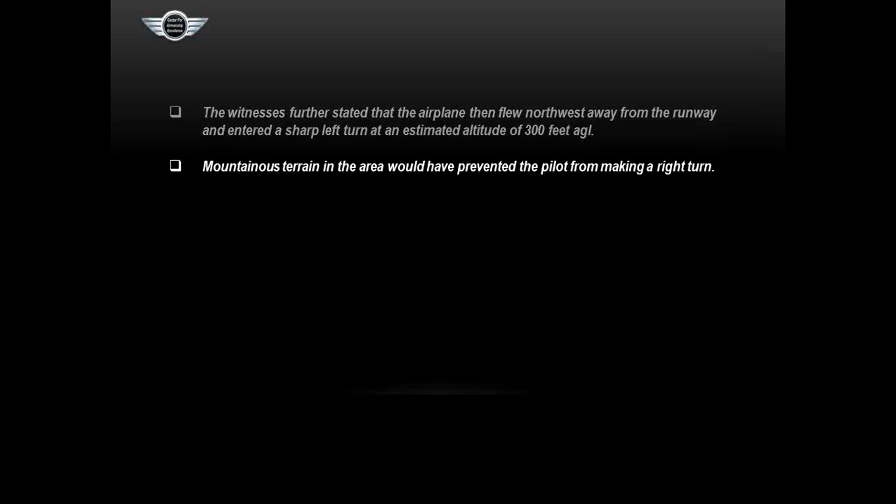The witnesses further stated that the airplane flew northwest away from the runway and entered a sharp left turn at an estimated altitude of 300 feet AGL. So when he got it down there, he wasn't in position, so he started a steep left turn. Mountainous terrain in the area would have prevented him from making a right turn, so he had to make that left turn. The witnesses reported seeing the airplane roll to the left before entering a steep bank, pitching down and impacting the ground. Classic signs of a stall spin.

Wreckage evidence indicated that the landing gear was extended and the flaps were fully retracted at impact. So he had the gear down, but he hadn't used the flaps for any additional drag to make that steep descent. Tough call, you know, with the controllability problems. I'd be reluctant to put flaps down, but you know, he was clean.

Post-accident examination of the engine revealed no evidence of any mechanical abnormalities that would have precluded the engine from producing rated power. No mechanical anomalies associated with the engine were recorded by the EIS. Physical signatures observed during the engine and propeller post-accident examinations were consistent with the engine operating in a mid to high power condition at impact. So loss of power was not the problem here. The airplane would have still flown.

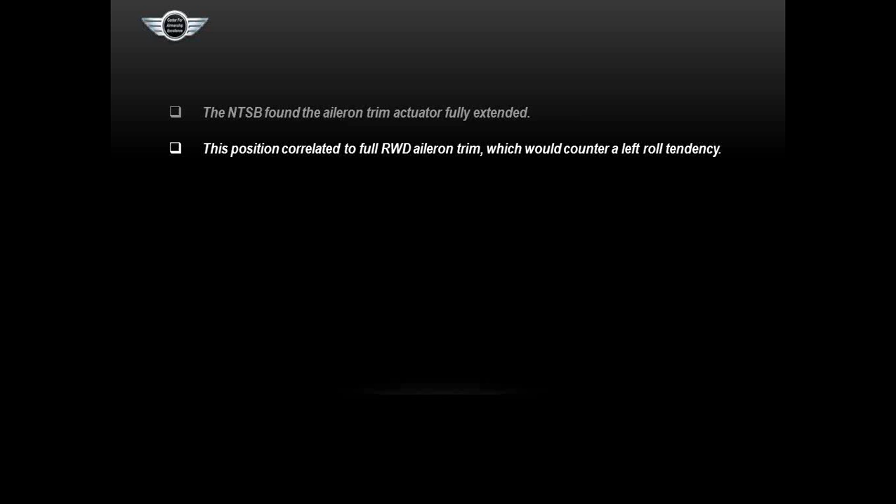The NTSB found the aileron trim actuator fully extended, right wing down aileron trim. So as I mentioned earlier, that assumption about him cranking in the trim was a good one because they found evidence of that. The rudder trim actuator was also found fully extended, which correlated to an aircraft nose left rudder trim. Remember, heavy in the left wing, so you wouldn't have aircraft nose left. You'd have aircraft nose right, but the actuator was found extended fully in the aircraft nose left trim position.

The rudder trim function of the yaw damper system had likely trimmed the rudder full left. So there's another reason, or it reiterates what I said earlier about turning on a yaw damper. You're not sure what it's doing, and sometimes it can do what you don't want it to do. In this case, it did.

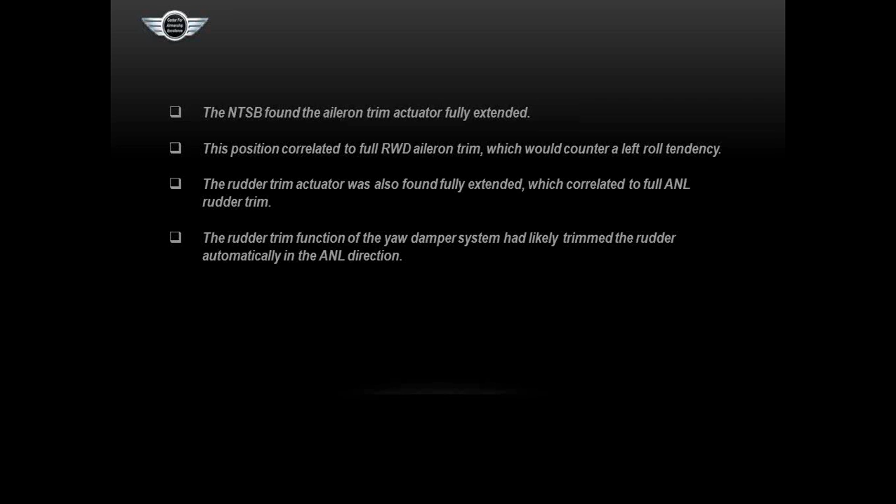This rudder trim position, along with the aileron trim position, would have placed the airplane in a forward right slip. Remember, he's making a left turn, and he's got left wing heavy, but he's in a forward right slip, which would be inconsistent with the heavy left wing fuel balance, but would be consistent with him doing a slip to try to increase drag without increasing airspeed and get it down to the runway. And that's good pilot technique normally, but he's flying an airplane that's barely controllable in a fairly aggressive slip here to lose altitude close to the ground.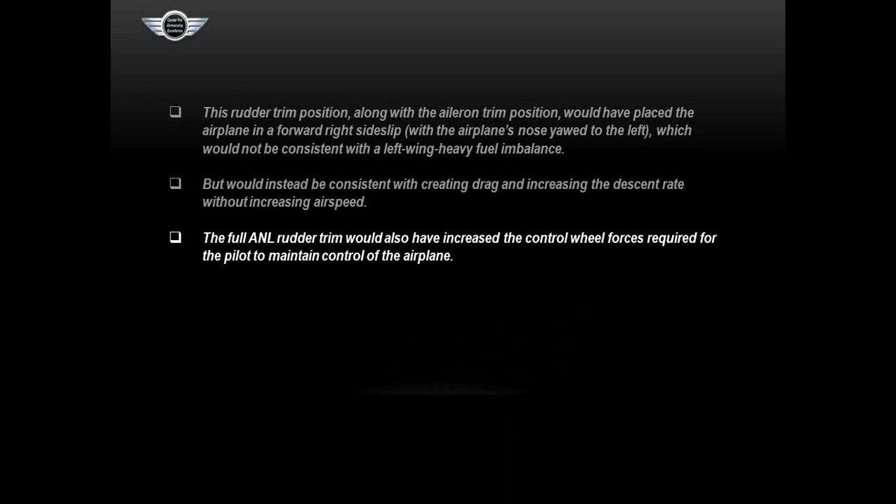The full aircraft nose left rudder trim would also have increased the control wheel forces required for the pilot to maintain control of the airplane. It would have increased the amount of right control wheel force, aileron control force required. Post-accident calculations prepared by Pilatus indicated that a fuel imbalance of about 1,300 pounds, which is about where he was at, would require 22 degrees or 55% of the aileron's full 40 degree range. So a 20-pound control wheel force would have been required, which is less than the 50-pound maximum control wheel force allowed by certification. And with that adrenaline flowing, he could have handled 50.

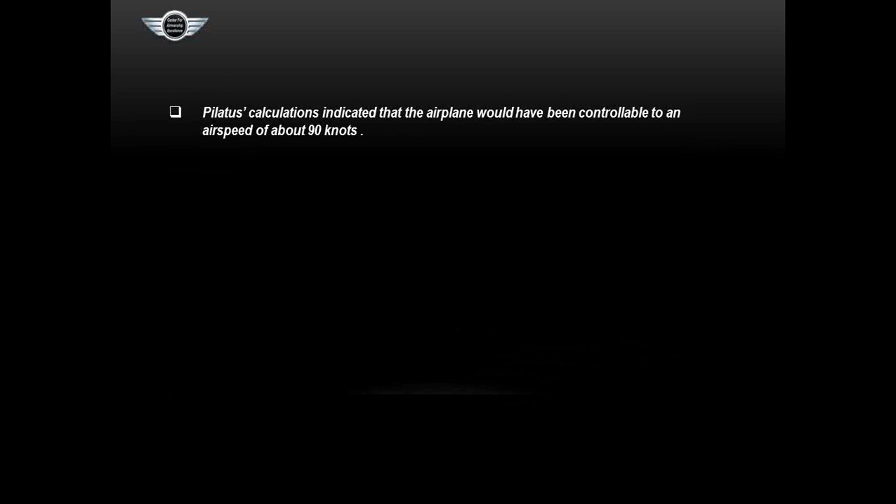So he still had controllability, they think. This was an analysis. Of course, they weren't in the airplane. The engineers and the aerodynamicists came up with the analysis. Pilatus' calculation indicated the airplane would have been controllable to an airspeed of about 90 knots, and they think he was flying at a much higher airspeed the whole time, which is just below the PC-12 stall speed of 93 with that particular fuel imbalance situation.

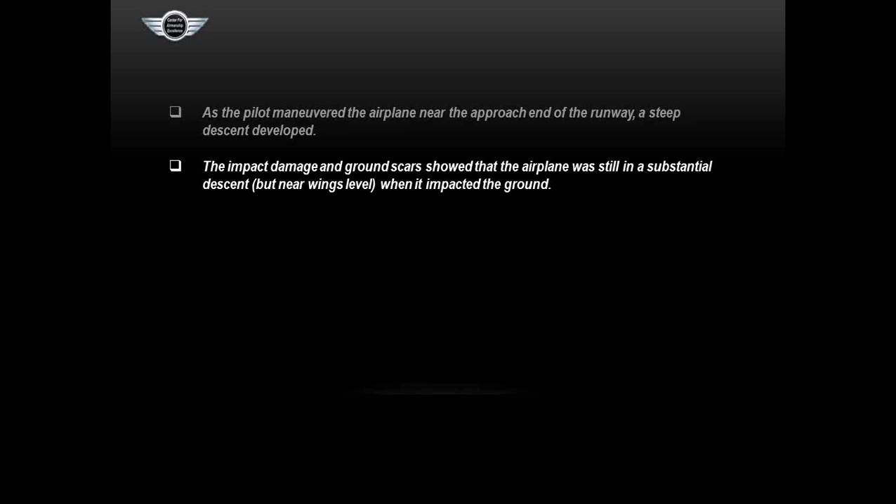As the pilot maneuvered the airplane near the approach end of the runway, a steep descent developed. The impact damage and ground scars showed that the airplane was still in a substantial descent, but near wings level when it impacted the ground. So either he got enough control to overcome the left roll and got it level by the time he hit, or that was just about the way it happened with the spin. That's how it turned out. A large left roll angle also was developing during the maneuver.

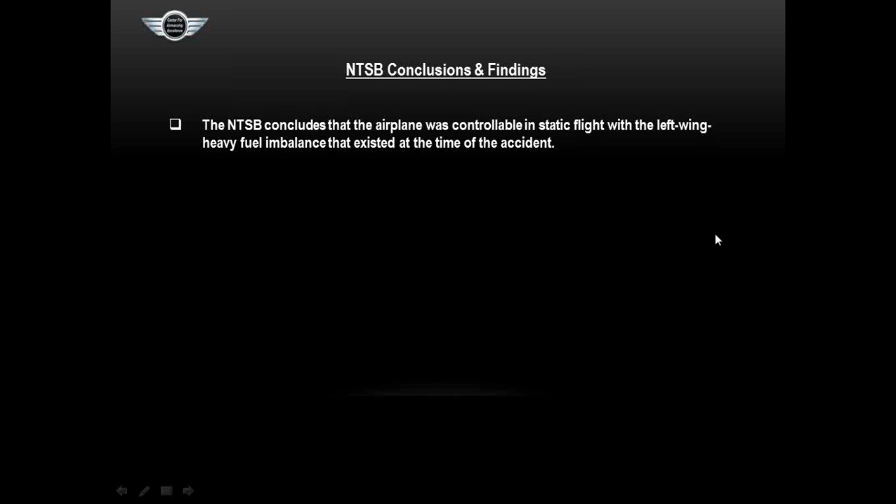So here are the conclusions. Coming down to the end, NTSB conclusions and findings. Very interesting. The NTSB concludes that the airplane was controllable in static flight with the left wing heavy fuel imbalance that existed at the time of the accident. So the NTSB agrees that this airplane was controllable when it hit the ground.

The pilot did not maintain control of the airplane with dynamic maneuvers during the final moments of the flight. Let me back up. If he had not been so aggressive in his maneuvers, if he had just flown a more realistic pattern, it wouldn't have happened. But he was forced into it in his mind by thinking he was almost out of control when he still had some control left, and he could have done some other things. But he rushed it. He got into dynamic maneuvering, and that's where he got beyond the control authority he had left. The investigation found that the pilot was properly certificated and qualified in accordance with the regs. The investigation also found no evidence of a pre-existing medical or behavioral condition that might have adversely affected the pilot's performance on the day of the accident.

However, I would submit that if you were studying airmanship, and you study Airmanship 2.0, you would say that he was exhibiting rogue pilot behavior and he was an accident waiting to happen. But the NTSB isn't looking at accidents quite that way yet.

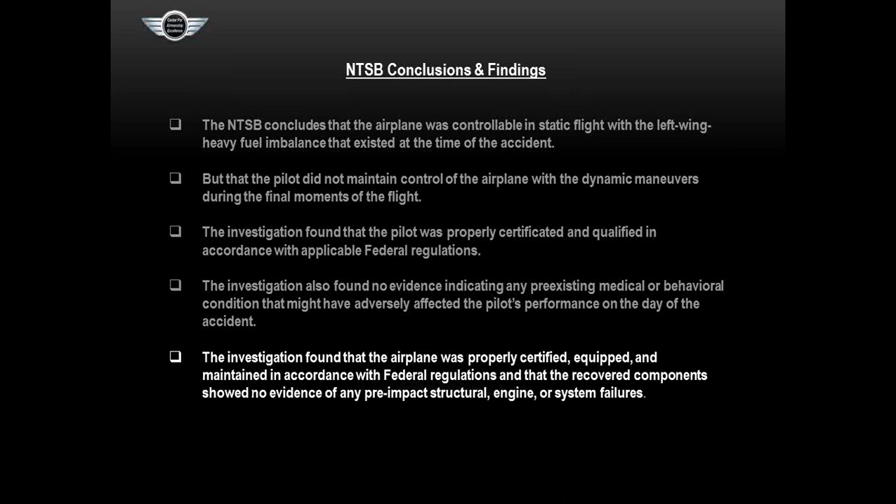The investigation found that the airplane was properly certified, equipped, and maintained in accordance with the regs, and that all of the recovered components showed no evidence of any pre-impact structural, engine, or system failures. So this was a pilot error, pilot-induced accident.

The low fuel pressure state and the restricted fuel supply from the left tank during the accident flight were the result of an accumulation of ice in the fuel system, with an initial concentrated amount of ice at the airframe fuel filter. So that got clogged up with ice.

If the pilot had added a fuel system icing inhibitor to the fuel for the flights on the day of the accident, as required, the ice accumulation in the fuel system would have been avoided and the left-wing-heavy fuel imbalance would not have developed. Remember, that was required by the AFM.

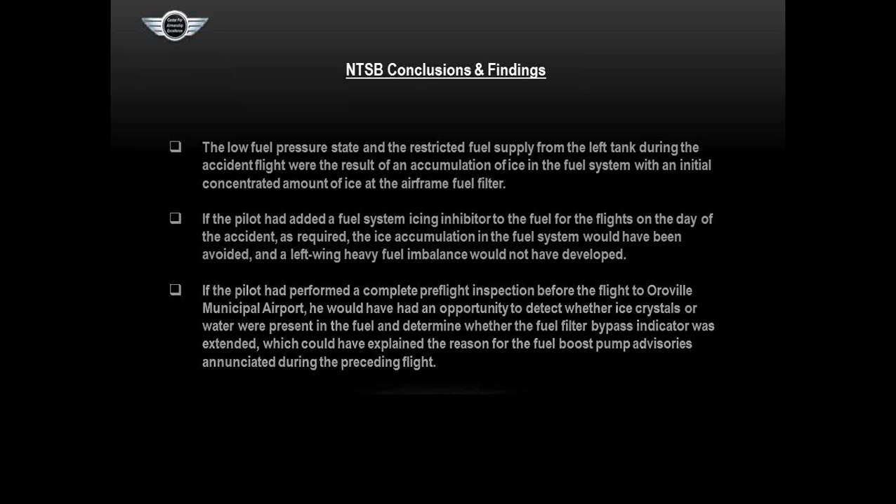If the pilot had performed a complete pre-flight inspection before the flight to Oroville, he would have had an opportunity to detect whether ice crystals or water were present in the fuel and determine whether the fuel filter bypass indicator was extended, which could have explained the reason for the fuel boost pump advisories annunciating during the preceding flight, or at least given him another clue to go ask somebody who knew the system what was going on.

About 1:21 into the flight, the fuel supplied to the airplane's engine was being drawn solely from the right tank by the right fuel boost pump, and the left-wing-heavy fuel imbalance continued to increase. Again, these are NTSB conclusions and findings. The left and right fuel tanks were equally receiving fuel through the fuel return lines, but the left-wing-heavy fuel imbalance continued to increase during the flight because fuel was only being drawn from the right tank.

The fuel system continued to provide fuel to the engine throughout the flight, even with the low fuel pressure state and the degraded performance of the left-side fuel system. Maybe not for a whole lot longer, but certainly long enough. He had more time to get the airplane on the ground than he took.

Although the pilot should have diverted to a nearby airport once the maximum allowable fuel imbalance had been exceeded, which is in the book, the pilot eventually diverted to Bert Mooney at Butte, likely because he finally recognized the magnitude of the situation, and his attempts to resolve the increasingly left-wing-heavy fuel imbalance had been unsuccessful.

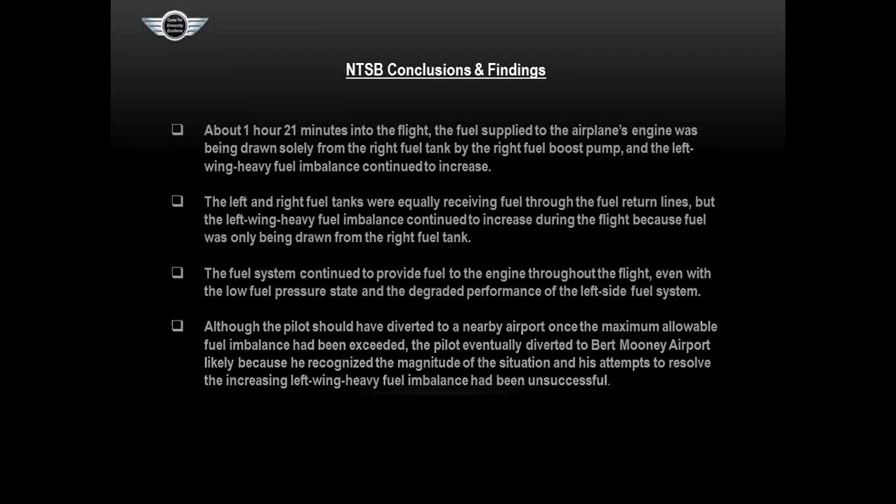And I would say ludicrously persistent attempts to solve the problem. He should have stopped much earlier with those attempts to solve the problem.

The airplane was controllable in static flight with the left-wing-heavy fuel imbalance that existed at the time of the accident, but the pilot lost control of the airplane with dynamic maneuvers during the final moments of the flight. He almost made it. The large left rolling moment induced by the left-wing-heavy fuel imbalance could have been minimized or even avoided if the pilot had followed the required procedures in the AFM.

If the pilot had diverted earlier to one of the several suitable airports along the route, the outcome of this flight would likely have been different, because the airplane would have had a less severe fuel imbalance and the pilot would not have had to contend with the airplane's deteriorating performance as the imbalance steadily progressed. The pilot underestimated the seriousness of the initial fuel imbalance warnings because he had not experienced any adverse outcomes from ignoring similar previous warnings.

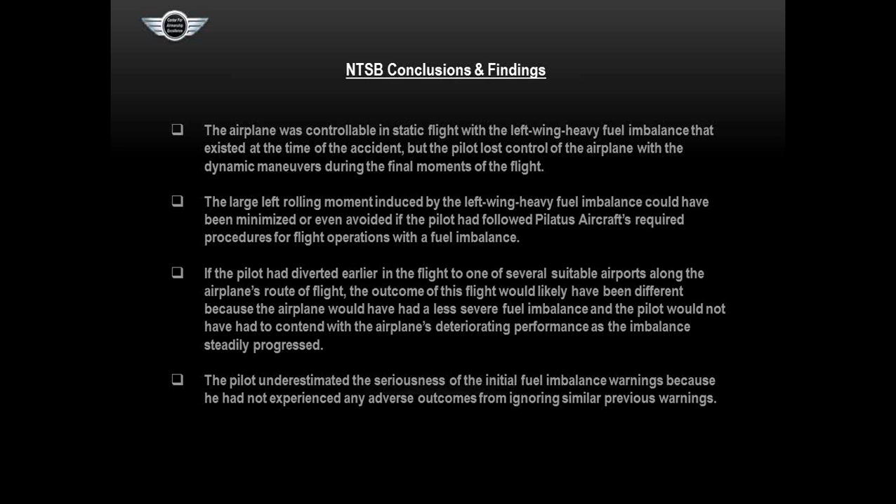And we find that this is a setup for a fall in airmanship over and over and over again. You get away with something first time, second time, third time, but that doesn't mean you're always going to get away with it. So he was setting himself up for this fall.

The safety hazard involving fuel system ice accumulation could have been mitigated if fuel filler placards installed on the aircraft requiring the fuel system icing inhibitor specified that requirement. So his team let him down here.

The FAA, the manufacturer, if they put that placard right on that hole that he put that fuel in, maybe he would have used it. Who knows? This guy was obviously flaunting the procedure, though.

FAA pilot and operator guidance on the use of the fuel system icing inhibitor would help raise awareness of the need to include this additive in turbine engine powered aircraft fuel systems that require it. I agree with that. It's not emphasized enough in initial and recurrent training, at least when I was doing it for these guys.

At least 4 of the 7 children on board the airplane were not restrained or were improperly restrained. I think, in my mind, this is criminal. If this guy had lived, they should have put him up, because nobody can hang on to the weight of a child in a crash sequence with their arms.

It's impossible. The forces are too high. So if you've got a kid on your lap and you go through a crash sequence, the kid's going to get killed, or at the very least very seriously injured.

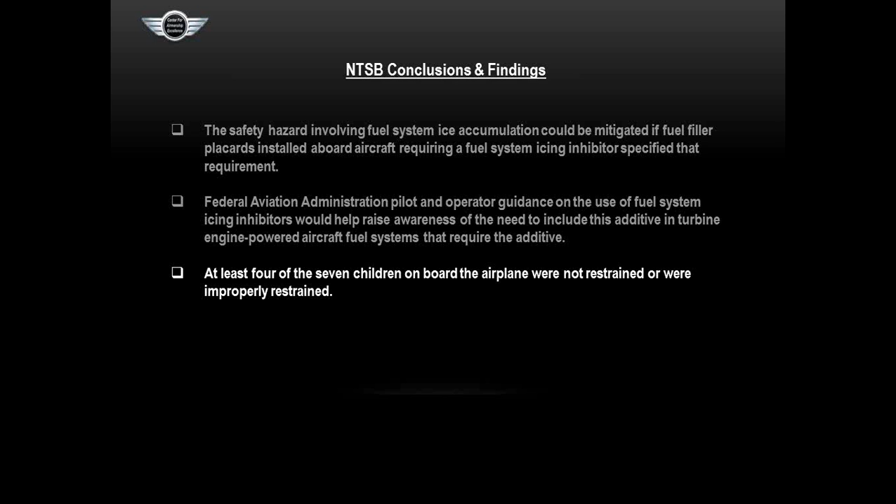So that's poor decision making on the parents' part, on the pilot's part. He should know that, but most of them, 4 of the 7, weren't restrained.

Although the number of passengers on board the airplane during the final leg did not comply with the PC-12 airplane flight manual limitation requiring no more than 9 passengers, the 4 additional passengers on board the airplane did not directly affect the outcome of the accident. So that's the board's conclusion.

Now, I think they kind of missed it here. If you count all the fatalities, then it counted, that affected the outcome there, but it wasn't a link in the error chain. It's an indicator that this pilot was flaunting regs and procedures, which is a link in the error chain.

For survivable accidents, passengers aboard airplanes operating under Part 91 would be afforded better crash protection if each seat and restraint system were limited to only 1 passenger and children less than 2 years of age were restrained in an approved child restraint. So this is something to think about if you're taking kids flying.

I would never put a kid in a seatbelt with an adult. Think about that. They're going to get crushed with that weight and the force of the adult against them in the seatbelt. They make a nice airbag for the adult, but it's hard on the kid. If you don't have any kind of restraint, they're going to go flying.

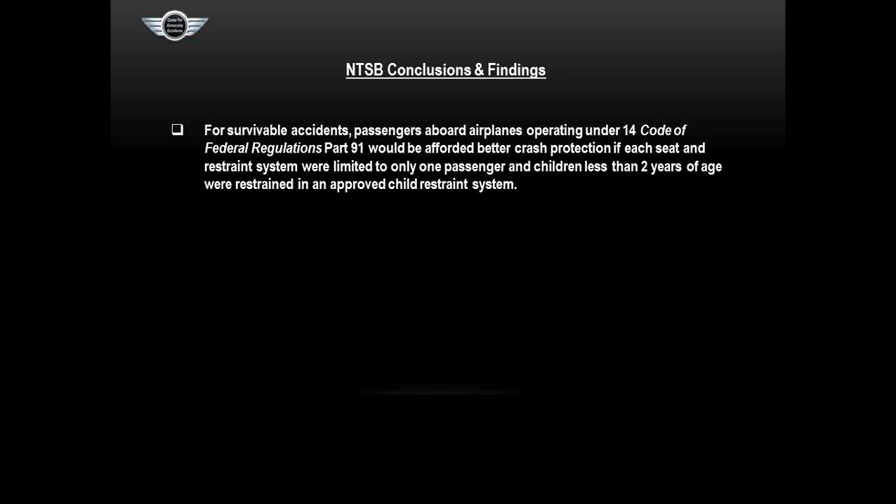So the best thing is they should have their own seatbelt, being a child, and better if they're under 4 or 8 or 10 or whatever the rule is for cars, in a child seat, an approved child seat.

The rule says, by the way, you can put 2 people of no more than 170 pounds under Part 91 in one seatbelt. I think that's a totally nuts rule.

Although the download of the non-volatile memory data provided key information in determining the circumstances that led to this accident, a flight data recorder system that captured cockpit audio, images, and parametric data would have provided additional information about the accident that was not possible to determine from the downloaded non-volatile memory data.

This is a big part of Airmanship 2.0: flight data recording, flight data analysis, and trend analysis and so forth. This is part of the Airmanship 2.0 thing that he didn't have, the insurance policy didn't have.

The NTSB has been saying this on almost all of the accident reports I've been seeing, that they want to have this in all the cockpits of all the airplanes, and I agree with them.

Heck of a safety tool, not only for the NTSB to analyze accidents, but for all of us to use in our personal post-flight analysis of what we did, how we did on that flight.

Now we come down to the NTSB probable cause. The NTSB determines that the probable cause of this accident was, number 1, the pilot's failure to ensure that a fuel system icing inhibitor was added to the fuel before the flights on the day of the accident.

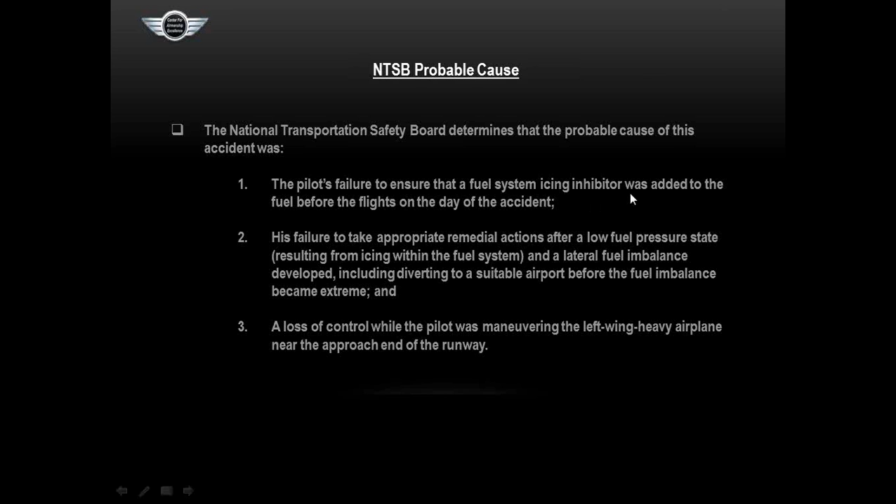So I just want to take a couple of minutes here, less than 5 hopefully. I think we can do it that fast because we're almost at the end of the webinar, and I appreciate all you guys hanging in there. But I want to show you how this fits into Airmanship 2.0. As I mentioned, we use the current airmanship model as the scaffold for Airmanship 2.0.

So let's just think about this for a minute, the links we've seen in the error chain that came together to cause this accident, and how if this guy was practicing Airmanship 2.0, or the flight was operating within Airmanship 2.0, it would have been avoided.

First of all, let's look at discipline, the first bedrock principle of Airmanship 2.0. This guy had poor discipline. He wasn't following prescribed procedures. He was becoming a rogue aviator. Discipline in his life, flight discipline, had obviously become a problem, and that's a problem for his airmanship.

Skill, I'd say he had pretty good skill. He had a lot of time. Of course skill is dependent, you've got to keep those sharp, which results in proficiency. He'd been flying maybe not quite enough to be at the peak of proficiency, but he did just come out of training, so his skill level was probably way up there, and his proficiency was probably more than adequate for the basic flight. Now, as we see, his stick and rudder skills in the end proved to do him in, because he used that forward slip at a bad time. So his proficiency and skill levels were not where they should be.

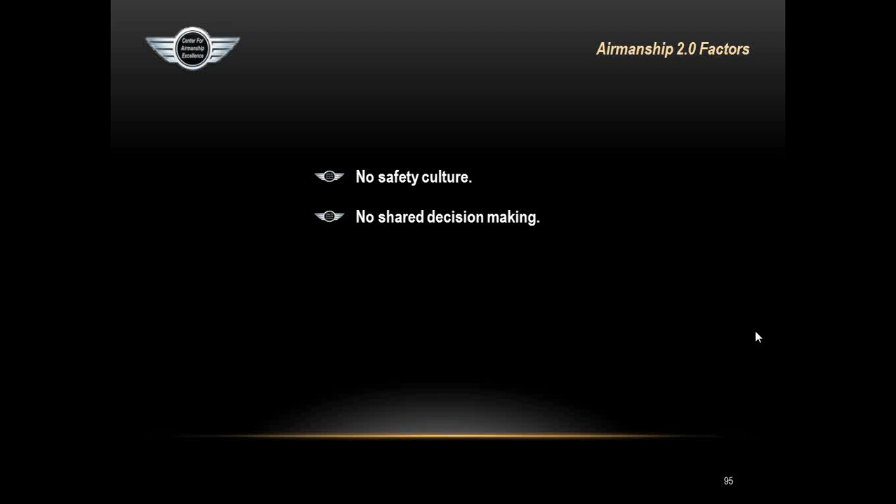So he had no support, no shared decision-making on the go, no-go decisions, nobody to keep him in check on overloading the airplane, and so forth. No check and balance system, no safety management system in his operation. And you would have all of these things in Airmanship 2.0, and if he had these it would have eliminated several of the links in the error chain that he built.